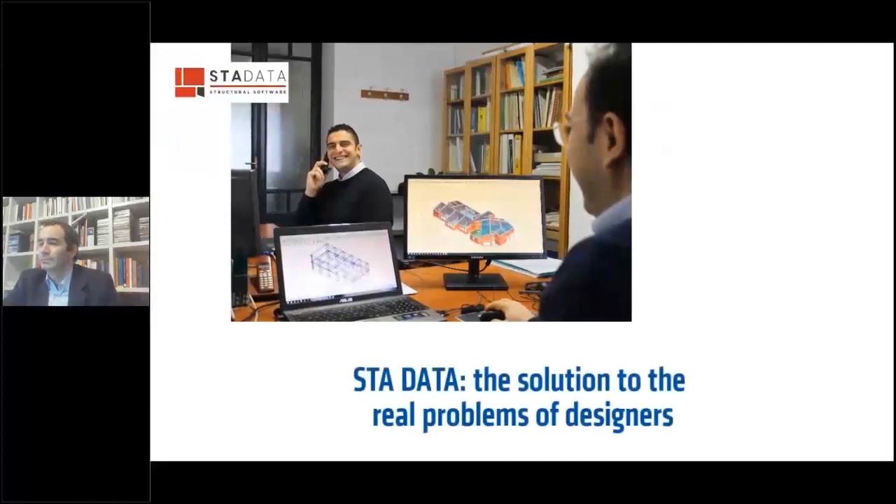The company is currently composed of 15 employees and several consultants, all highly qualified professionals. Thanks to continuous development of work and collaboration with universities and the professional world, it is always able to offer advanced and constant updates to its customers. The Stadata application allows you to face everyday work with simplicity and effectiveness. The company's goal does not end with the search for new IT solutions; the offer of Stadata includes support, training, and consulting services, including individual projects, so that professionals are immediately operational. Thanks to the technical expertise and state-of-the-art solutions, Stadata is a solution to the real problems of designers.

3Muri is the masonry structures analysis specialized software. It is the leader in the world. It is used for existing and new buildings. The software performs nonlinear pushover analysis. The mesh is made with the FME method, frame by macro element, specially studied for masonry structures to better represent the behavior of masonry structures.

Now the software is available in Italian, Greek, English, German, French, and Albanian, and performs analysis according to Eurocode 6, Eurocode 8, the Italian National Code, Switzerland National Code, and the Netherlands National Code. 3Muri takes its origin from Professor Lagomarsino's academic research, and is actually used for this purpose in more than 80 universities. Engineers and companies that use 3Muri for professional purposes are widespread in more than 30 countries.

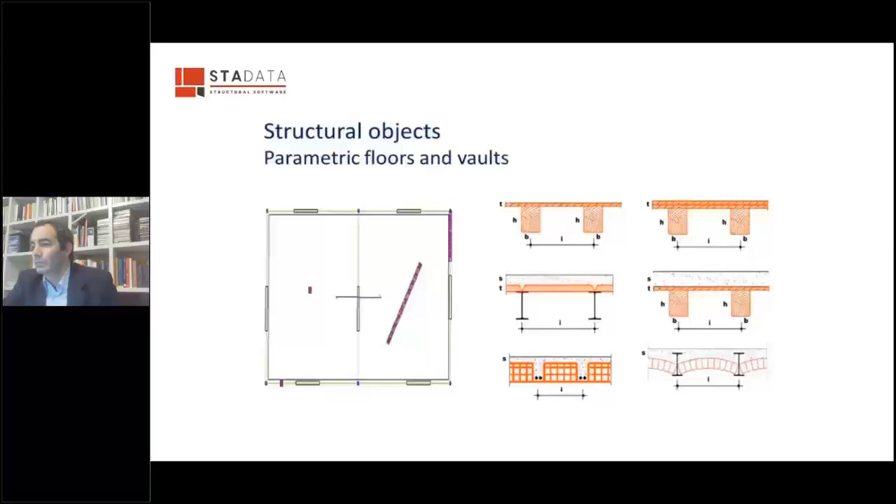These are the floors that are available in 3Muri. Even if the majority of floors can be modeled with this library, in 3Muri it's always possible to define directly all the parameters of a floor, in order to create your own definition and achieve the real stiffness of the real floor you have in the structure.

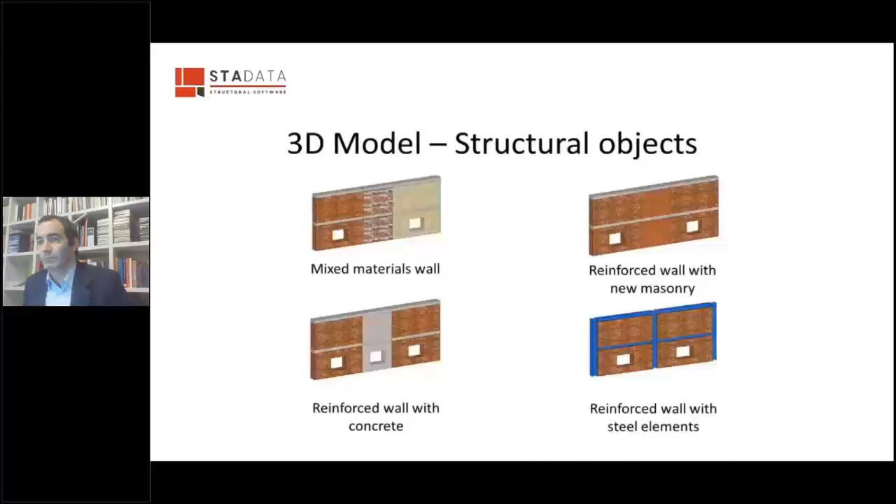Moving to the vertical elements, several structural objects can be modeled in 3Muri, like single masonry walls or reinforced concrete walls, columns and beams, and a combination of walls with beams and tie rods. Inside a wall, different materials and different elements can be modeled, and they can also have the function of reinforcing the current wall.

To reinforce walls in 3Muri, you can easily also model reinforced masonry, with reinforcement using FRP and FRCM. The mesh inside 3Muri is specialized for masonry structures and is made with a frame-by-macro-elements method. This method has been studied for masonry structures to better represent the behavior of a structure made with masonry as the main structure. Using this method, thanks to the automatic mesh performed by the software, the engineer can easily pass from reality to the model, taking into account all the significant aspects of the structure.

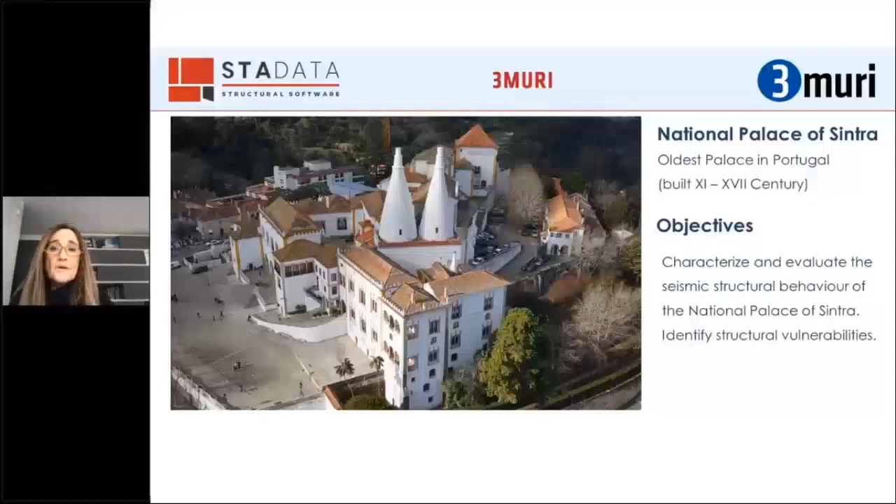In order to perform a complete seismic assessment of the palace, a multidisciplinary approach was followed with a multidisciplinary team. A historical approach was performed along with a visual structural in-situ survey. Significant in-situ surveys were done before proceeding with the experimental campaign. For the experimental campaign, we started with a geometric survey using a laser scanner and a Falcon 8 Plus drone. We also performed ground penetrating radar surveys, sample collection for the masonry, flat jack tests, and ambient vibration tests.

From the cloud points obtained with the laser scanner and the drone, a 3D BIM model was developed in Revit, which includes, beyond the geometry, attributed data of various types assigned to each element of the BIM model. So we included in the final model historical documentation, description of materials, construction stages, information from experimental in-situ tests, and even the main outcomes from the seismic assessment analysis performed on the whole palace.

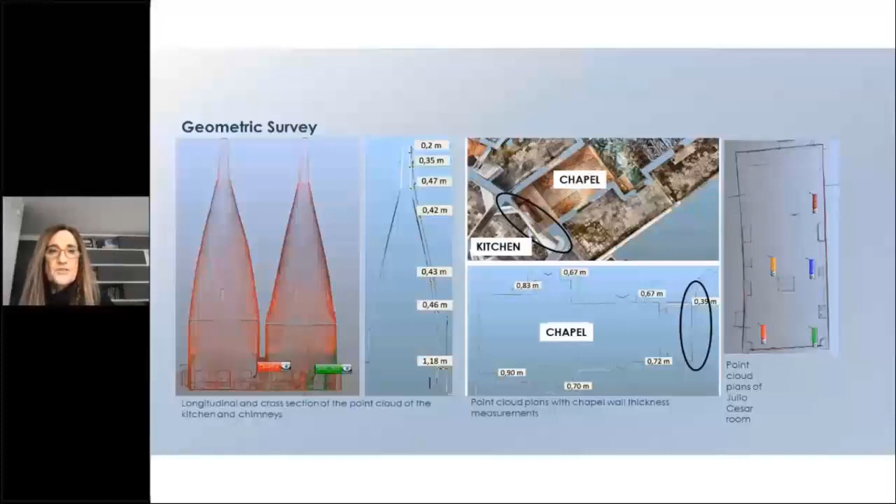So what we have is the complete geometry of the two massive conic chimneys in the palace, the possibility to be sure about the thickness of some walls which connect different parts of the palace, such as the chapel and the kitchen, where the width varies completely along the length of the wall, or to detect some curved walls that would have been impossible to get from other surveys without using laser scanning.

Thus, for this type of complex masonry building, I think this is the correct way to get the geometric properties of the structures.

As far as the GPR survey is concerned, we performed these tests not only in some of the walls where samples were removed, but also in all the pavements and vaults, just to be sure if they are infill or not, and in some walls that were built against the rock, to be sure how was the connection between the wall, the soil, and the rock.

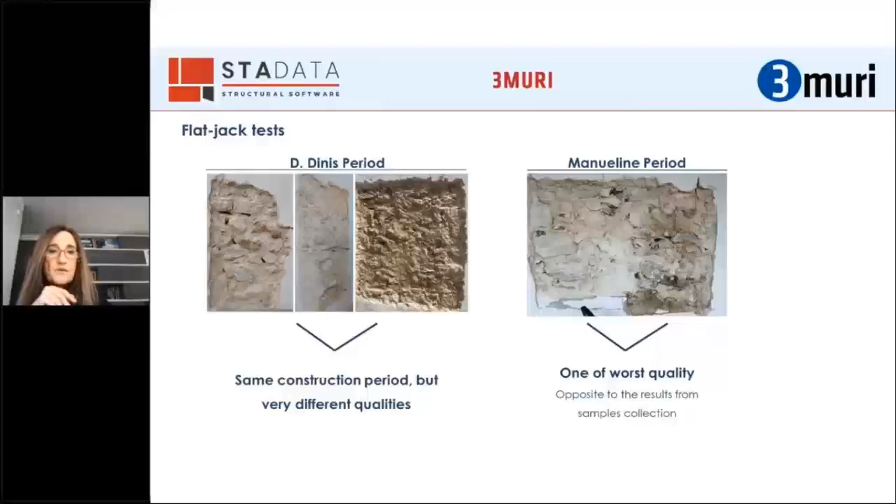The flat jacks were done with 25 centimeter depth for the size of the flat jack. We have here an image of the flat jacks used. The results obtained with these tests were considered with caution, because you have very thick walls and you are testing just the external part of the walls. We performed single and double flat jack tests, and with this we estimate the actual state of stress in the masonry, and of course its strength and stiffness.

A campaign of ambient vibration tests was performed in some of the palace bodies, chosen for their structural importance, existence of damage, and history. These tests allow us to identify the dynamic characteristics or dynamic properties, frequencies and modes of vibration, which in turn were crucial for the numerical calibration of the models.

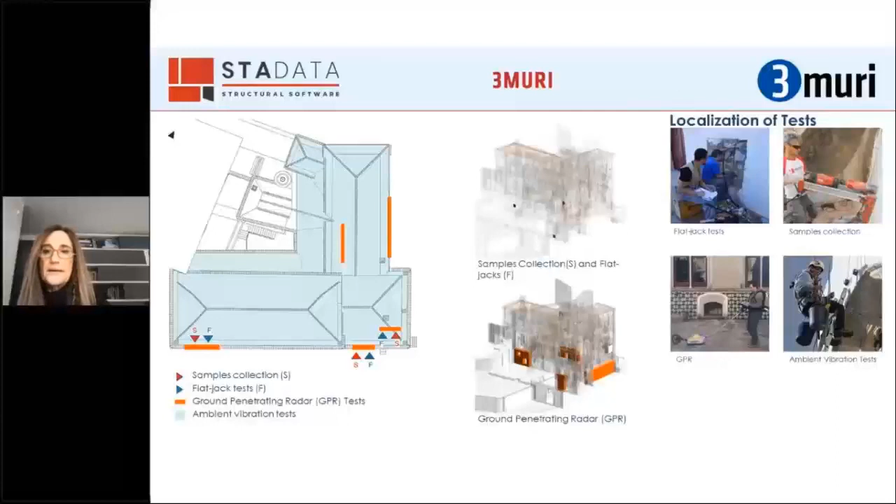The locations of the experimental in situ tests were represented in the BIM model. So you have here the plan view of the Manueline building, and the main results obtained linked to the model or added to it as attributes. We have here some images of the Manueline building and the tests that were performed in this building.

In the BIM model, we identified all the floors and walls where the GPR tests have been performed, and the main results are linked to the BIM model, with the report showing the main results of these GPR tests.

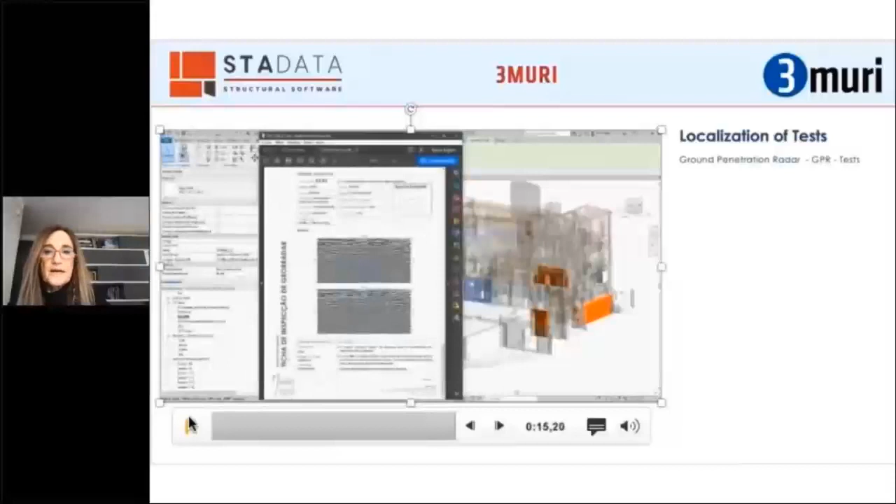The mechanical characterization of the materials, defined after the experimental campaign and calibration of all the numerical models, was also linked to the BIM model. Here you can see, for the same building, all the types of masonry and materials considered in the model, as well as the properties needed to perform the nonlinear analysis of the global model with the 3Muri program.

So let's move now to the definition of the seismic assessment itself and numerical modeling of the palace. The definition of an effective nonlinear model for the seismic analysis of masonry structural elements represents a crucial step towards a proper seismic assessment of existing masonry building structures.

For the seismic assessment of the palace, we considered the in-plane and out-of-plane responses of the masonry, and we performed nonlinear analysis.

Considering the size and complexity of the palace under study, as this figure illustrates, I believe the macro modeling approach is the tool applicable to large-scale computations. Thus, in this study, the seismic behavior was assessed by performing nonlinear analysis through the 3Muri program.

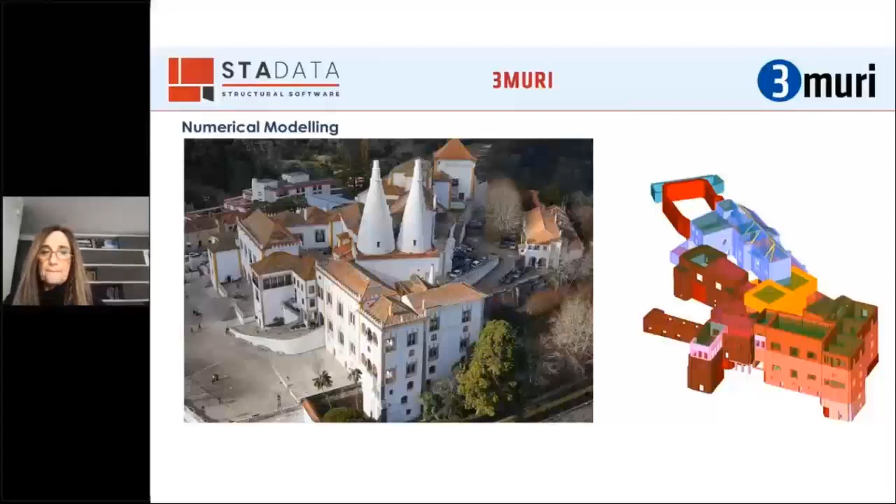Therefore, separate models were developed and calibrated, considering at all times the effect of the adjacent buildings, taking into account the field survey and results of the experimental campaign, mainly the ambient vibration tests, which were crucial for the calibration of the different numerical models.

So here we have the identification of all the bodies considered in this study, with the designation of the names that we gave to all the bodies.

I have to say that among all these units, unit 1, the Manuelino building, and unit 10, which corresponds to the kitchen with two high chimneys, were the most challenging ones, for different reasons.

For the Manuelino building, the challenge was mainly due to the dimension of the building, irregularity in plan and in height, different levels, and walls without continuity in height. These were the main reasons why it was so difficult to reach the final model of this wing of the palace.

For the kitchen, unit 10, the challenge was mainly due to the presence of the two massive chimneys with a conical configuration. In this case, we used different software.

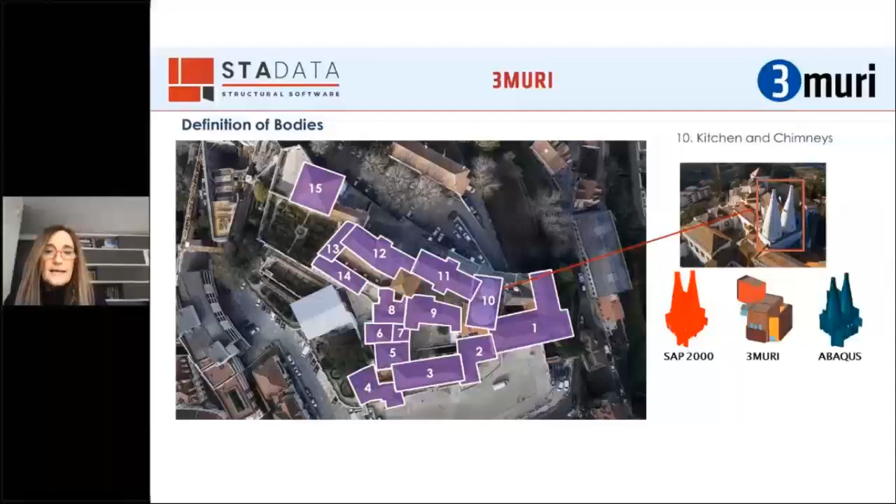So now, to illustrate the type of results obtained, the main results for this Manuelino building and for the other body connected to it, unit 1, I'm going to show very briefly the main results that we obtained.

So for the Manuelino building, as you can see, we have the building itself here, and of course we modeled it taking into account the constraints imposed by the other building. This is the other building which connects to the Manuelino building at this part, and this is the kitchen which connects as well.

So small parts of these buildings are modeled, the ones necessary to obtain the correct dynamic characteristics of the building and the analysis. And we have considered different types of materials, described on the right side of the slide.

For the global seismic assessment, taking into account the in-plane behavior of the walls, we have performed nonlinear static analysis with the Tremuri program. In this slide, the damage pattern is represented for the ultimate displacement of the pushover analysis, for the load applied in both X and Y directions.

The distribution of damage of different masonry walls is represented for the near collapse limit state. This extreme situation allows us to identify the most vulnerable structural masonry walls and the type of behavior we are expecting, shear or bending controlled behavior.

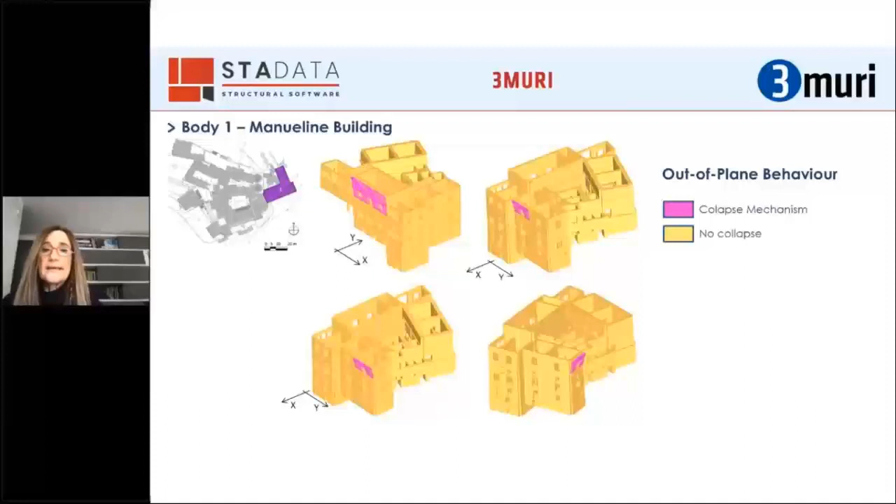So a similar type of study has been done for all the other units or bodies into which we have divided the palace. Just very quickly, what we got for the other buildings, bodies 2, 3, and 4, which were connected to that Manuelino building.

In this slide you have the materials we considered for this body. Here again, the damage pattern having performed the nonlinear static analysis for both directions. Once again, we have shear problems for the piers at this intermediate level.

In this slide it represents only the most vulnerable walls, and again the out-of-plane behavior has been considered as well, taking into account exactly the same factors that I already mentioned.

We have defined different probable mechanisms, and we have studied this out-of-plane behavior.

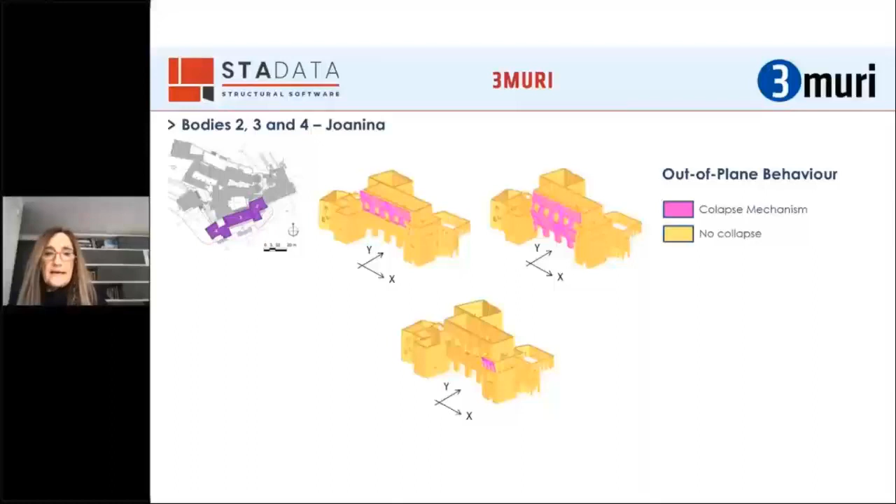So, to finish my presentation, just a few final comments that I would like to give. Due to the complexity of this cultural heritage building, the seismic assessment poses a strong demand on structural engineering skills and, of course, on the available structural analysis techniques.

The procedure followed here seems capable of providing a reliable seismic assessment of such complex structures. In my point of view, it's a good compromise between computational effort and guaranteeing a trustworthy assessment.

So, related to this last image, in this study we had the BIM model represent the distribution of damage of different masonry walls for the near collapse limit state. These have been implemented in the 3D BIM model.

In this work, we did not explore the Tremuri-BIM model. This should be explored in the future, and of course, an easy incorporation of these results in the BIM model.

As attributes, this enhances the capabilities of BIM, and of course it will be very helpful decision support within the heritage management framework, and certainly it will be very useful for any management team of this type of structure.

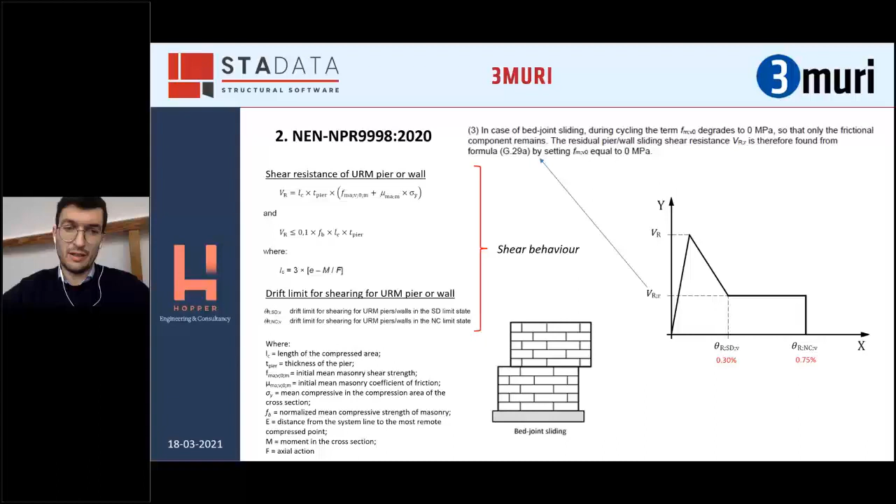Maybe another important thing is when to stop the analysis. Generally, a 20% decay is used. In the Netherlands, in the national code, 50% decay is used, meaning a reduction of the base shear by half, and this is used to define the final pushover curve.

A little bit of insight, because I think it's interesting comparing with what is commonly done in Eurocode, is about the calculation of the demand. In Eurocode, as you know, and also in Italy, we generally use the N2 method. Instead, in the Netherlands, it's normal practice to use the capacity spectrum method.

The capacity spectrum method is basically a method in which the elastic response spectrum should be reduced, accounting for an extra damping. The final damping is a sum of the inherent damping, the common 5%, and the hysteretic damping, which is calculated and suggested by the equations, and generally cannot be bigger than 15%. So one note is that generally all the buildings easily have a 20% damping.

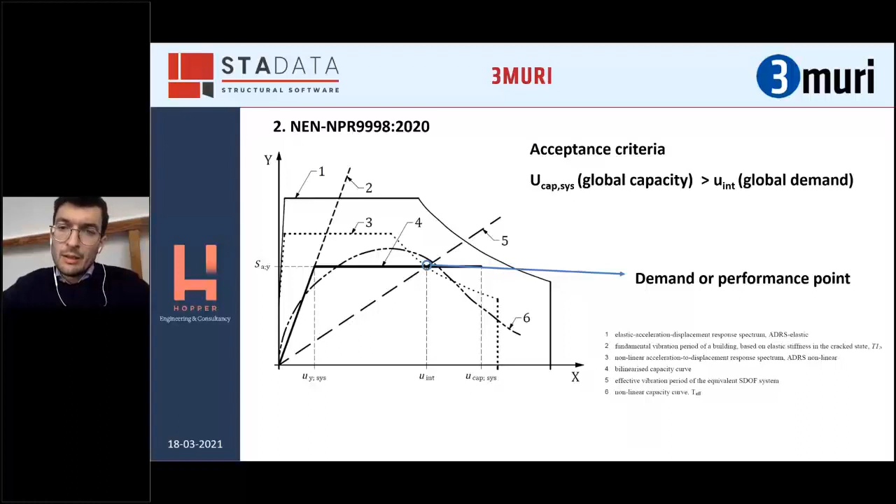Let's move quickly to the examples. Those attending from the Netherlands will recognize this as a very common building type there, also in the Groningen province. This is a terrace house, basically a composition, a block with more units.

It is characterized mainly by large openings in the longitudinal direction in the front and back facade. So we have a very weak direction, the longitudinal, and a very strong direction, the transversal. The load-bearing part is usually the transversal walls. In this case you can see concrete floors, but you can easily find a version of this building with timber floors. The floors generally span from transversal wall to transversal wall.

Another peculiarity of this building is the presence of cavity walls in the perimeter walls, all around, for insulation purposes. The inner leaf usually, not always, is composed of calcium silicate bricks with a thickness of 100 millimeters. There is a cavity gap of variable measure, it depends, and then another leaf composed of clay bricks. So the structural, load-bearing part is the internal one, the inner leaf.

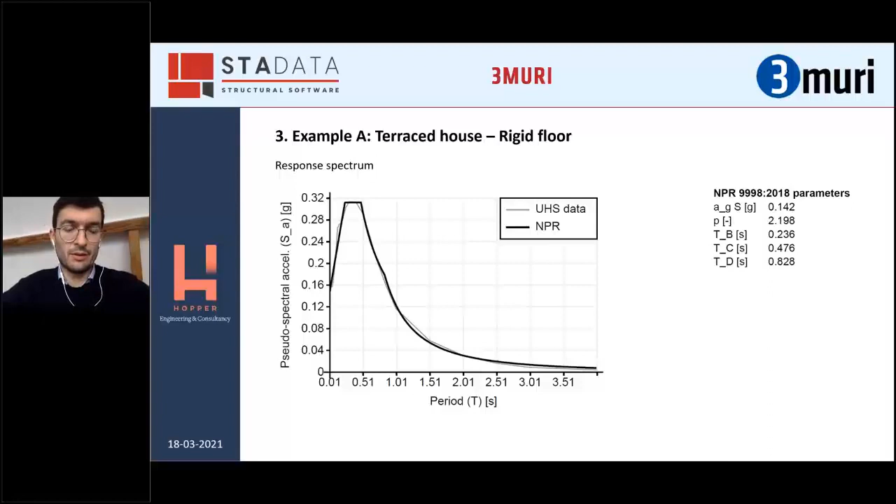Here is an example of how to go from the 3D model to the 3Muri model, to the 3Muri analytical model, in which, as we just said, there is no roof. The response spectrum can easily be downloaded from a web tool.

So some results for this particular building: the longitudinal direction is governed by flexure because the piers are very slender and few of them due to the openings. The capacity is quite large. The spectrum has a damping of 20%, creating an intersection, so the check is okay. The building is okay.

This is the worst combination in X. An interesting aspect of the NPR is that you can account for P-delta effects. Basically, when you have not too many piers, you can derive a factor by which you can reduce the capacity or increase the demand, depending. In this case, we reduce the capacity.

Completely opposite behavior in the Y direction, the strong direction, in which the building is reacting mainly in shear due to the squat walls. As we said at the beginning, this is the strong direction, and you can see by the intersection with the elastic spectrum happening at the elastic range - also in this direction there are basically no issues.

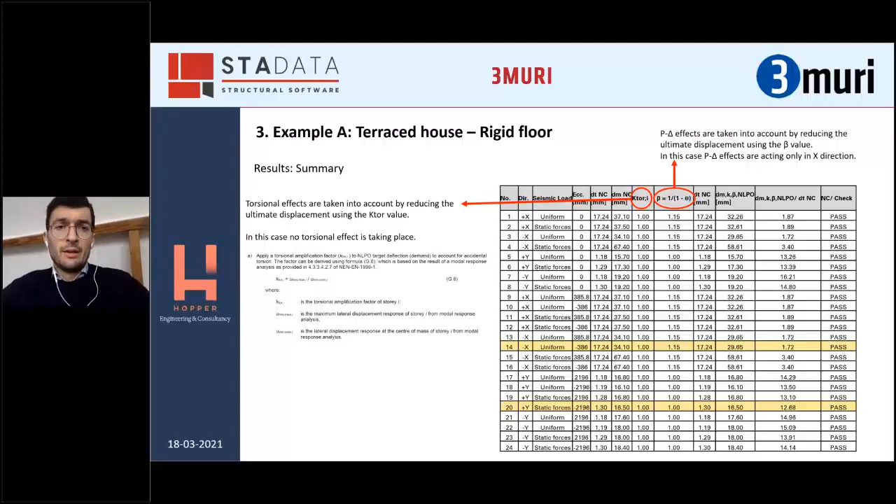As well known, pushover is not enough to provide an idea about deficiencies and possible retrofit measures required for a masonry building. So usually when doing this kind of assessment, we always do a modal response analysis to check the roof and timber components, and also to calculate the torsional factor.

The second typology I would like to present is the so-called detached house, in which basically they are isolated buildings, mainly one floor. They also present a different but still timber roof. Sometimes the roof can be very, very complex. There is no weak and strong direction clearly, so it depends on the configuration of the internal walls.

Also for these buildings, we can have cavity walls or solid 100 millimeter walls or solid 210 millimeter walls, but always quite slender walls. A challenge of these buildings to model in 3Muri is that sometimes some of the walls are basically below the level of the ground floor. So usually we fix a floor level and then we play with individual walls in order to match the effective height of the pier, since the final capacity of the buildings will be derived from the effective height.

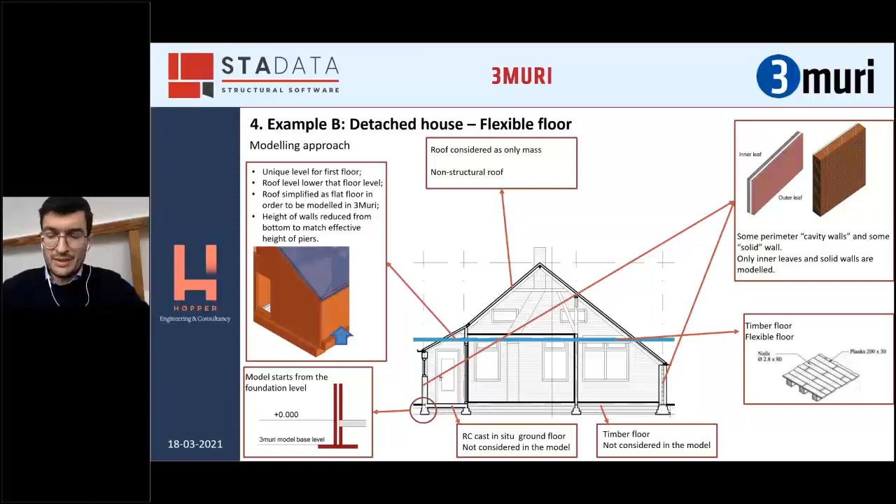Same as the previous building, we don't model the roof structure. Another peculiarity of these buildings is very often they have timber floors, so flexible floors. Comparing with the previous building, in which a global analysis is correct and possible, for this type of building, since redistribution is not guaranteed by the flexible floor, we prefer an assessment wall by wall, in which redistribution is not taken into account at all.

So again, this is shown now to go from a 3D model to a 3Muri model to a 3Muri analytical model, in which we don't have the roof. Response spectrum follows the same as before. Results in this case are presented wall by wall, as we said. This is again one of the worst combinations in the X direction, in which the outcome is positive.

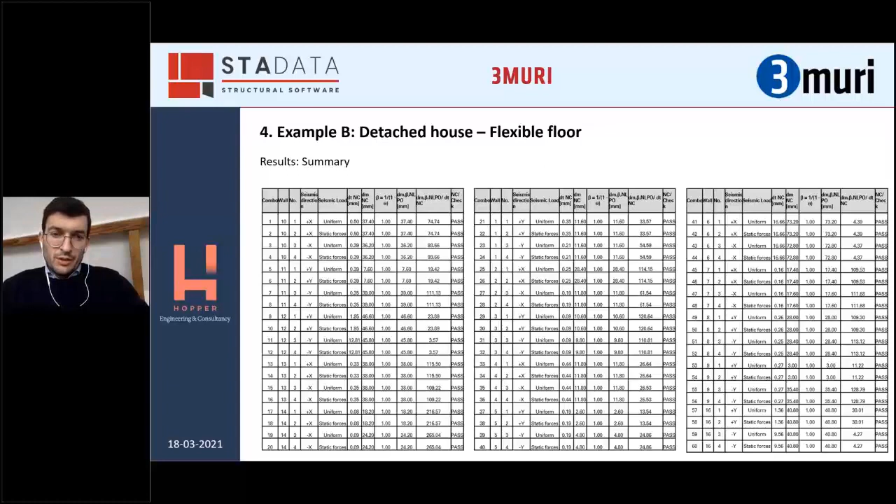Same for a wall in the Y direction. And if you want to have a summary, here of course the combinations are more, but they are not the combination - it's just that it's a wall-by-wall assessment. As you can see also here, basically all the walls are fine.

So again, I will not repeat, but basically in order to have an idea about the building, a number of other analyses, assessments, and checks need to be done.

So finally, some conclusions to wrap up. Along the years, specific advanced studies and analysis were carried out in order to adapt the approach from Eurocode and New Zealand code to Dutch buildings for the in-plane assessment. Several tests and research programs were carried out along the years to improve and remove conservatism from the Dutch seismic code. The substantial reduction of gas extraction in the region during the years led to a decrease of the seismic hazard prevision. And as a result, despite the vulnerability of the buildings and walls that I highlighted somehow, there is generally no need for retrofit for the in-plane behavior in the vast majority of the cases, basically.

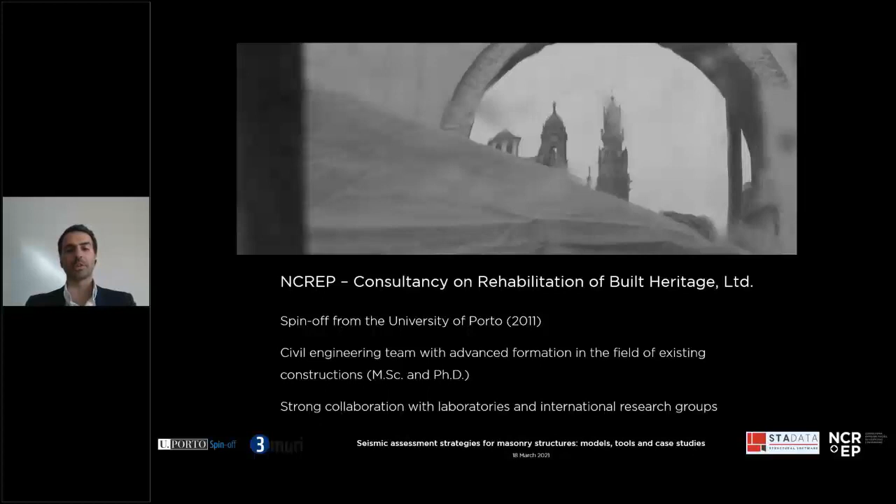Our main services can be divided into 4: inspection and diagnosis, structural health monitoring, seismic assessment, and the design of rehabilitation and sustainable projects for different types of constructions.

Taking into account a good network that we are developing from research inside Portugal, but also in Spain, Belgium, and Italy, with very good collaboration with the University of Pavia, we have been doing several works on characterizing the seismic behavior of traditional masonry buildings in low seismicity regions.

We have been working mainly in Porto, and this last year we were also able to do some work in the city of Liège in Belgium. The approach was similar: we started from the selection of the most representative building archetypes, then developed and calibrated macro element parameters to simulate the in-plane behavior for this type of building, and then analyzed typical buildings from these 2 cities.

These are 7 models that we used in the Porto region, and based on these models we did nonlinear static assessment with 3Muri, analyzing the buildings in original conditions and then also retrofitted ones. We then validated these results with nonlinear dynamic analysis, taking into account the flexibility of the diaphragms, making use of these models—work that we just finished this year.

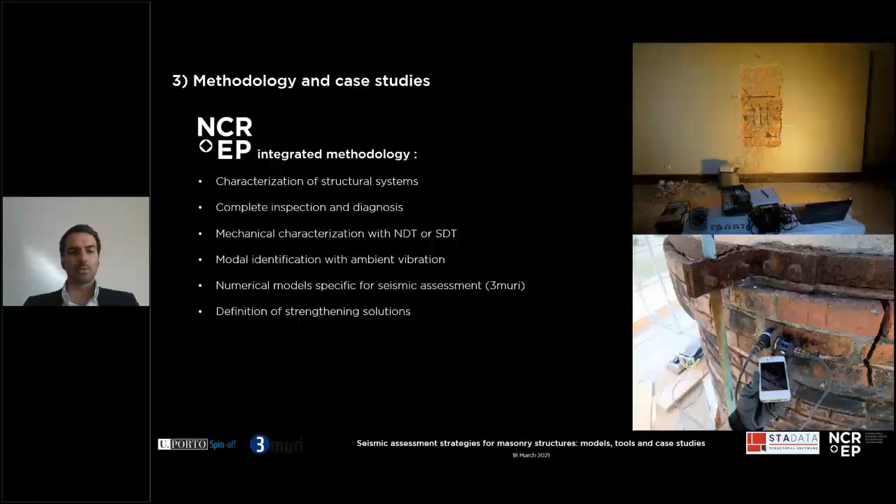With all this information, we develop our numerical models specifically for seismic assessment, where 3Muri is our main software for masonry structures. With all these elements, we are able to define the best strengthening solutions for each type of building.

Let's look at the actual conditions in Portugal. Despite Eurocode being used all around Europe, in Portugal it's only been legal normative since 2019, and since then it's mandatory to perform seismic vulnerability assessment reports for existing buildings. However, we have been using 3Muri since 2016, and one of the cases I'm going to show is the first building we simulated using 3Muri.

What are our main challenges? Basically the definition of masonry mechanical properties for seismic assessment, because there isn't a huge database we can consult—for example, like the Italian normative, which has very good indications of masonry properties. In Portugal, we don't have this type of information, so we make a literature-based definition with special relevance to the Italian normative, and we also use our own database, which we keep increasing.

We now have almost 50 double flat jack tests performed on different types of masonry structures, and our main goal is to continue increasing this database so we can more specifically select the best mechanical properties. Taking into account all these elements, I'm going to show you two case studies.

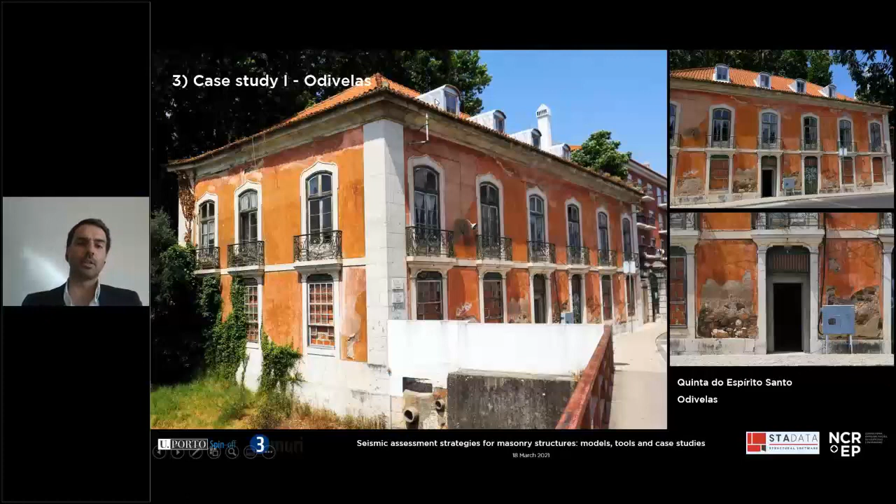Concerning the first case study: we have a ground floor, first floor, and an attic that was used during all these years. This building has an estimated construction date of the 18th century, with a total construction area of 780 square meters. It is a traditional masonry and timber structure, and it was abandoned since 2005.

What were the main challenges in this building? Despite being low—it's not a very high building—one of the main challenges was its intended use as a museum, and we'll see afterwards what implications that had on the design. It also has flexible diaphragms with timber floors.

One of the major problems of this building was the presence of severe termite attacks. This is, for example, a wall on the last floor—a lightweight timber wall fully attacked by termites, as you can see on the right. This means the timber elements were in a bad state of conservation.

In the end, this was a problem, but the major issue was at the first floor, between the ground floor and the attic roof, we have all these walls with mural paintings. This was a major problem in this case study.

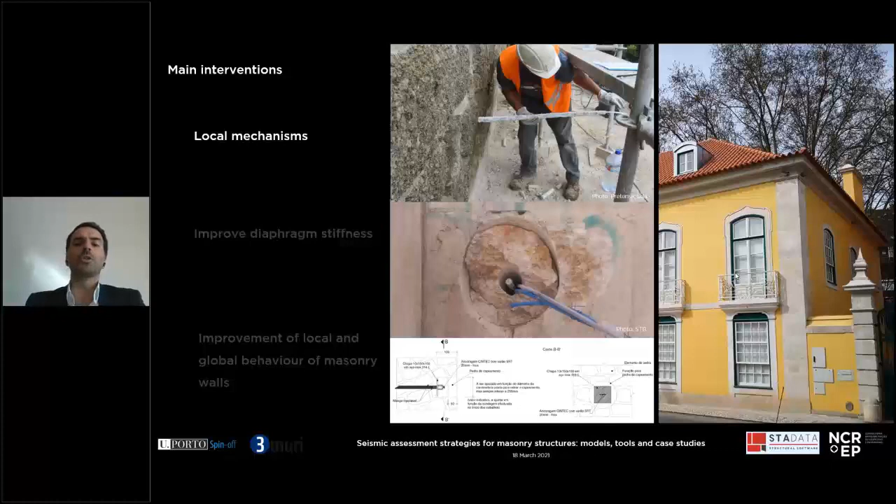Also some improvements to the diaphragm stiffness. How did we do it? We took into account the existing timber elements that were in the best state of conservation, but introduced intermediate supports so we could maintain these elements and keep the floorboards at the upper floors. Using horizontal timber trusses, we increased the stiffness of the diaphragm under shear and distortion forces. By connecting these elements to the perpendicular walls, we also improved the connection between horizontal and vertical elements. This is an image at the top of the ground floor, and this at the top of the first floor.

So we have a new timber floor for the attic, using a double layer of OSB strand boards, which improved the shear stiffness of the diaphragms.

Concerning the global and local behavior of masonry, some masonry elements—as shown here from the ground floor—were reconstructed using timber framed walls.

These are some images from the walls, from the demolished part that was not in a good state of conservation. They were supposed to be injected, but during the construction works, it was decided not to go for a museum, but just a more common office building. In the end, it was possible not to use injections to improve the seismic behavior.

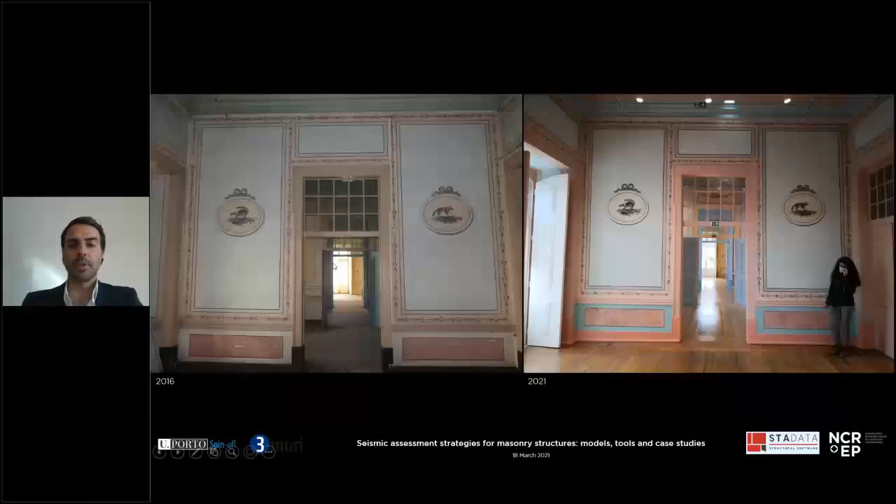Here's some local reconstruction of the timber floors and of all the frontal walls. Now some final images, just to figure out what can be done. We can see here that all these paintings were maintained. These are the original floorboards. The roof, the ceiling was reconstructed. This is the same compartment before and after the intervention.

And it came out that with 3Muri, we were able to keep the building as it was. Our main purpose was to keep the first floor.

So the second case study I want to show you is a typical building from Lisbon. It is a 5-story high building, with a possible date of construction in the late 19th century. It has a total area of 6,500 square meters, also with a traditional timber masonry structure. You can see here, mainly at the perimeter, walls of limestone masonry, the inner core also of masonry walls, and then some intermediate load-bearing walls that we'll see how they are built. So what were the main challenges here?

There was an extensive inspection and diagnosis campaign to characterize correctly these masonry elements, in order to model it correctly. Also mechanical characterization using flat jack tests and some cores, and we evaluated the dynamic behavior of the building using ambient vibration tests. This was a problem because it was a corner building, which could be an issue that we needed to address and assess with the seismic analysis. The final occupation of the building was to be used as offices.

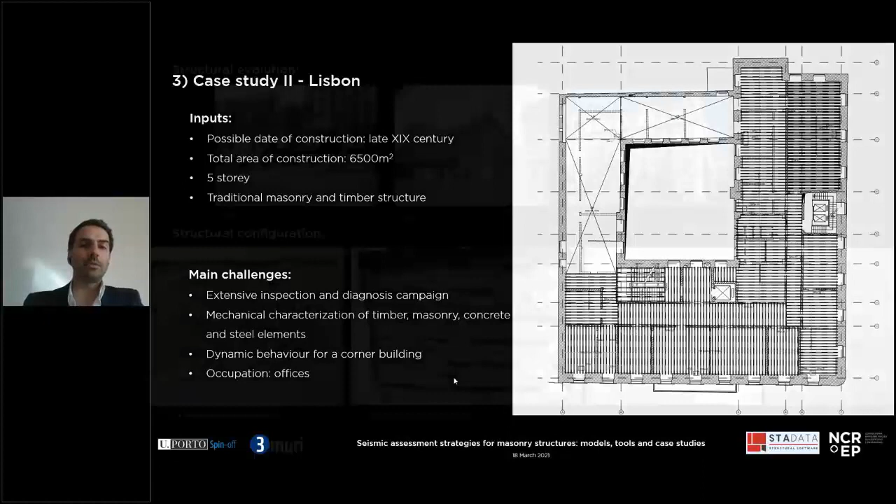So taking into account all the information, we start doing the work. One of the first points was that we figured out from some images from the late 19th century that until 1940, the building was just 3-story high. So in the middle of the 20th century, it came up with 2 more stories.

Also, another surprise was that these external and inner core walls were built on masonry, but the internal load-bearing walls were made mainly of timber elements that were supporting all these 5 stories.

What was used in our 3Muri model was to assume only masonry walls as primary seismic elements, as you can see here. These intermediate walls were not introduced due to negligible contribution to the seismic resistance. We have been doing some work in this area, and in the end, the stiffness and strength of the masonry is too great to be able to distribute the seismic forces to other vertical elements.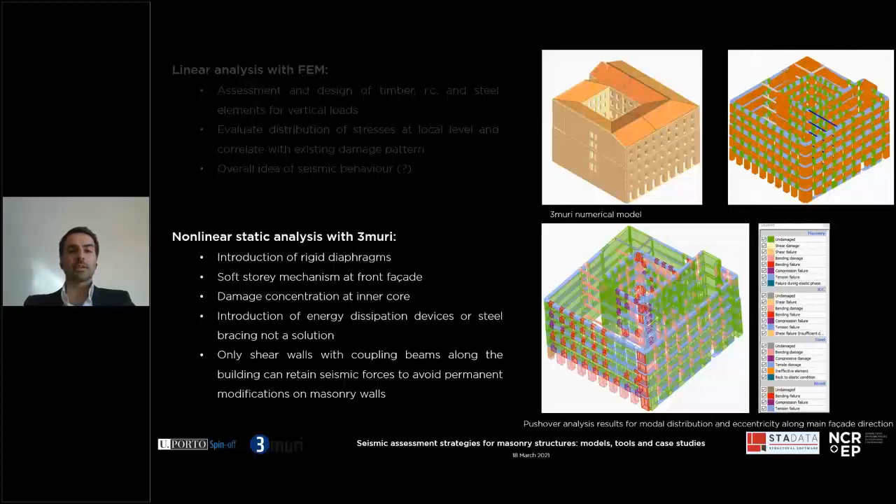As final remarks, I would say that before starting a deep seismic assessment of an existing building, it is quite important to do a complete inspection and diagnosis. And of course, when working with existing masonry buildings, nonlinear behavior is fundamental.

And for these purposes, 3Muri comes with a fast and efficient tool for the nonlinear seismic assessment. Just as a final comment, what we have been facing is that for these massive masonry buildings, we have difficulties changing the primary seismic system from masonry walls to other types of systems.

So the next challenge, coming in the next few days or months, will be the modeling and seismic assessment of this monastery of Odivelas, and of course 3Muri will again be our main software. I'll let you also get in touch with Ana Simões, who represents 3Muri in Portugal. If you need something, just contact her.

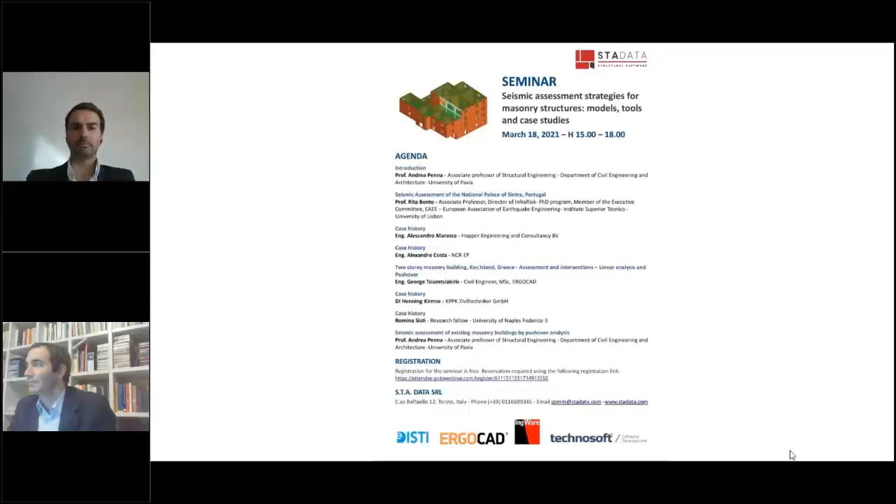I had lost control of my microphone, so I couldn't tell anything about your very interesting presentation. I think I made the right choice in skipping many case studies in my own presentation, because the presentations you, Alessandro and Rita have given so far, and probably the others as well, will be much more interesting and nice than mine. So I think that was a good choice.

Thank you again for this clear illustration of what you have done, the reasons, results, and methods used. That was, I think, very interesting.

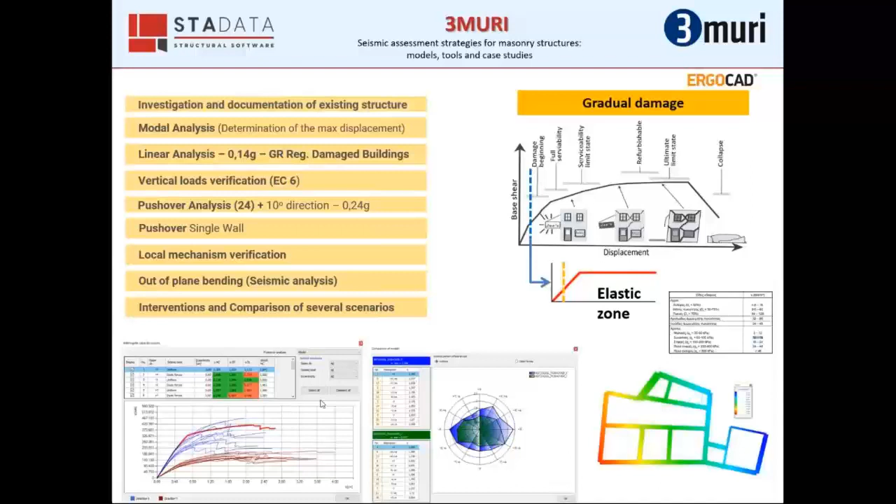First and foremost, we verified the geometry of the whole building and every element, and all the laboratory tests were done to find the type of masonry. From various parts of the building, we discovered that it had two-layer walls consisting of volcanic rock, marl, and limestone.

These photos are from the building. We can see here that there is an existing tie rod on the walls. And finally, we received as the characteristic compressive strength a value Fk of 3.05 megapascal. At the same time, we categorized the damages of each wall based on the categories provided by the Greek regulation for earthquake damaged buildings.

On the left, we can see the four categories A, B, C, D, and on the right, the ground floor plan and the first floor plan.

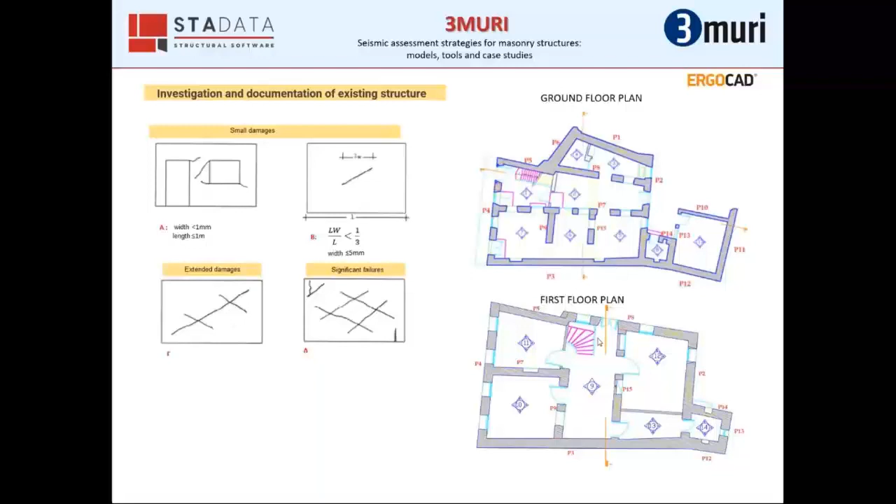In this slide, you can see again the floor plan of the ground floor and the fixing of the damages. The studies were done by Mrs. Halkidou and Mr. Sifonios.

Here we see the categories of each damage. The sum of the damages led us to the conclusion that this is a global failure and not a local one, so it was necessary to proceed with a global analysis.

As we mentioned earlier, we had to use the linear analysis because the building was built before 1959, and to insert the seismic forces as horizontal loads to the center of mass of every level with the same value. This is the formula we used, where epsilon takes the value of 0.14 of G and Ni are the vertical loads of each level.

For newer buildings, the distribution is different, as shown here on the right.

So we performed the linear analysis and noted the points where the damages appear on the walls. The goal was to then perform the operations on the damaged elements and to check if they are sufficient, or if due to the operations, failures in other elements occur.

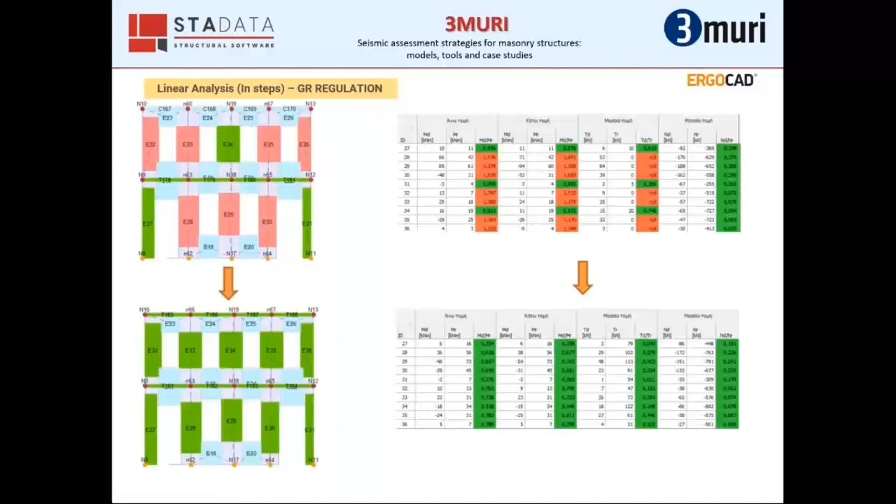Let's see the steps of this procedure. First step, we check the existing building before the damages. We get the results and we continue with the second step. Now we have to repair the damaged elements and check at the same time the remaining undamaged elements.

These are the interventions. First, we remove partially the mortar and install injection tubes at a distance of 30 to 70 centimeters in a diamond shape. Then we apply the Limepor IZ8 injection, which contains natural hydraulic lime because we couldn't apply mortar based on cement. Then we add facade grout with Kimia Tectoria M10 mortar. And finally, we have the application of Kimisteel Connect and the wall mesh MR system in two directions.

We have to mention that according to the new Greek regulation for the intervention of masonry buildings, named KADET, which is under development as we mentioned earlier, the application of deep pointing from 3 to 5 centimeters increases the compressive strength by about 15% using this formula, and by about 7% when we apply injection grout using the second formula. In our case, we used both of these interventions plus the wall mesh MR system, and for this reason we increased the compressive strength of the wall and the shear strength by about 15%.

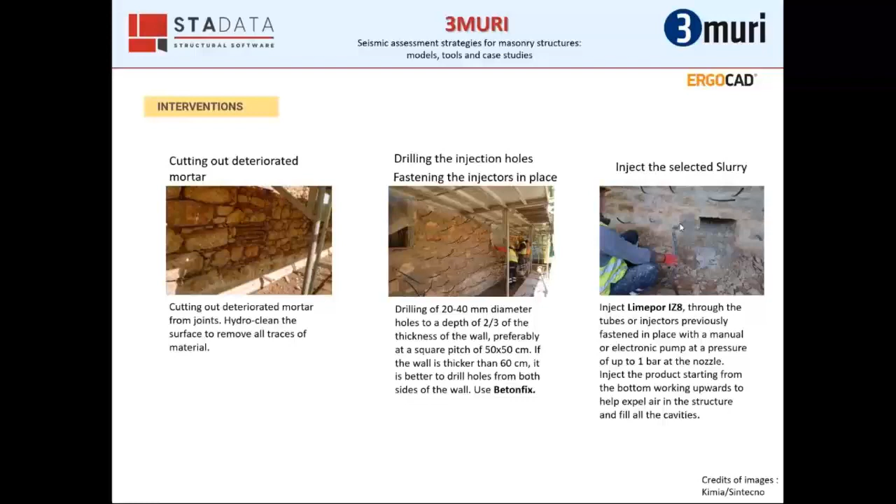Some days later, we started leveling. We prepared the mortar, laid down the first layer, and then made it smooth. We put the mesh and embedded it.

Later, we drill the wall and insert the connectors and lock them. Finally, we overlay the connectors and apply the final layer of plaster.

During the same second step of analysis, we decided to add a new layer with wooden planks in order to improve the displacement of the first floor.

After the analysis, we had some failures on undamaged elements, so we decided to replace the existing timber floor of the second level with a concrete slab, and we added concrete beams on the external walls. Finally, we applied the reinforcement, putting a vertical and horizontal mesh of rebars of 8 millimeters diameter every 15 centimeters.

In addition to linear analysis, we ran a static analysis for the verifications of vertical loads as described in Eurocode 6, where all the walls had enough bearing capacity. We can see the results here.

We also ran a modal analysis in order to determine the node which has the maximum displacement. This could be the control node of the pushover analysis, because we wanted to find the percentage of the mass which is effective for each mode, and later we checked the walls through a seismic analysis for the out-of-plane bending.

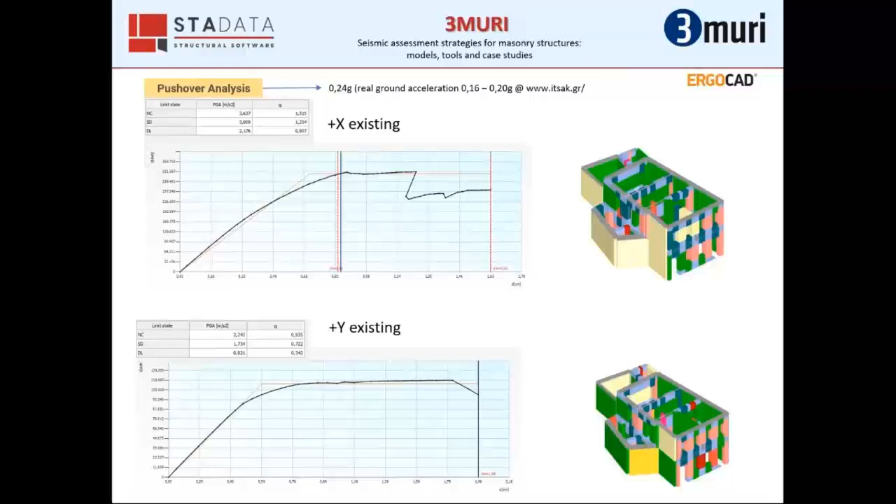Also, we have to note that the maximum displacement of the existing building was 1.63 in X direction and 0.98 in Y direction.

After the intervention, we had 2.65 in X direction and almost 3 in Y direction.

Based on the results of another pushover analysis where we used ground acceleration of 0.14 of G, similar to the linear analysis, we can say that the total cost of intervention could be reduced by about 30%, comparing to the conservative results of the linear analysis for the same ground acceleration.

It is worthwhile to mention that 3Muri gives a lot of tools to the end user. In this case, for example, we ran pushover analysis for all the main directions and eccentricities of the 3D model, 24 in total, but we also ran additional analysis for more directions in order to verify how the structure reacts to the direction of the real seismic force.

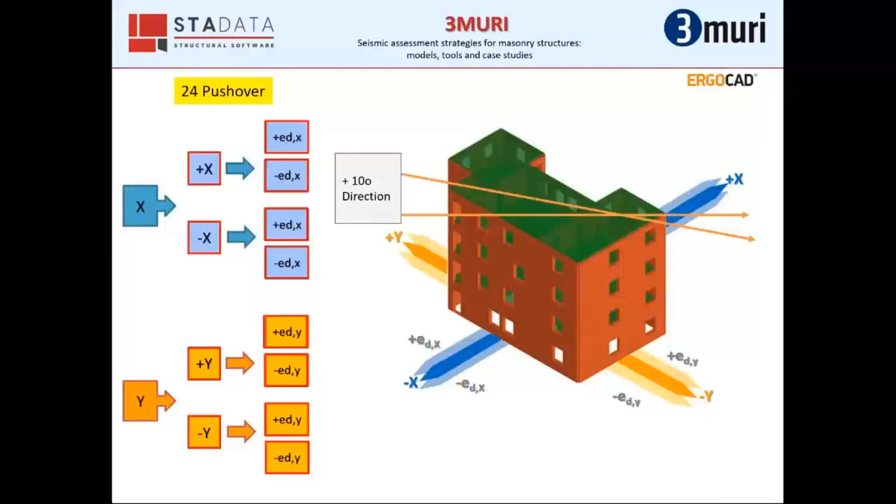We also, in this example, checked how the structure can respond if we divide it into two parts. The results were obviously better, but the division is not acceptable because of the region where the structure is built.

One of the advantages of 3Muri is the tool of local mechanism, which helps us to check every single part of the walls for the out-of-plane behavior.

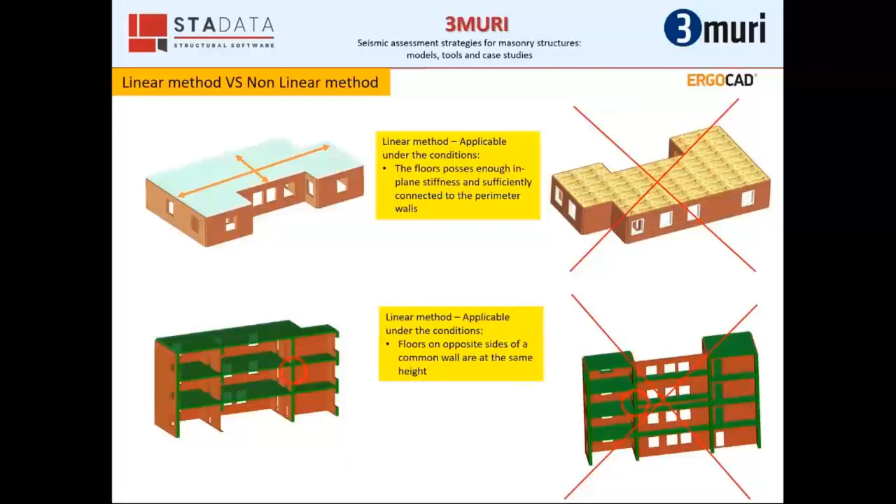Non-linear methods should be applied when the conditions are not met. Since all the existing masonry buildings have floors made of timber, it's not possible for the engineers to use linear analysis, and it is something that has to be solved in the future.

I think this presentation was also very interesting, and in particular, it is interesting to compare the different approaches and the different code regulations that are still implemented in different European countries. Besides, we have a common code, which is Eurocode. Then the national regulations can be very, very different.

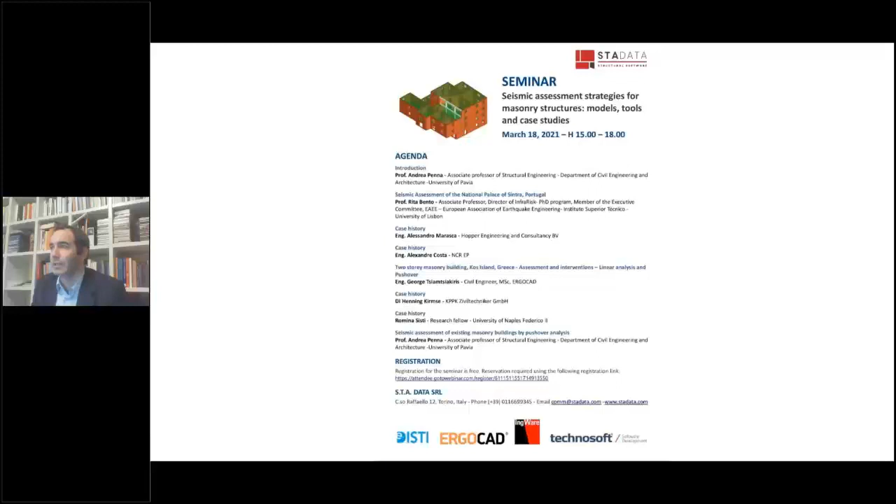The same applies in particular for the presentation by Alessandro Marasca, showing the application of this Dutch code that was actually partly derived from Eurocode, but also with some influence from the New Zealand and US codes.

I think we can now move to the next presenter, which is Henning Kirmse from Austria. I think that there will be some other interesting case studies and analysis that he will show us. Thank you, Henning.

Thank you very much. First of all, I feel very honored to be invited also to that event by ingWare and STA DATA. And I want to switch. Can you hear me? I guess it's fine. Yes, we can hear you. I can see you. Okay. Still not okay, screen must be there now. We see it as well. Okay, go on. Yeah.

Because I understood it as an interactive exchange, so I don't want to go so much in detail. I just had the idea to present a little bit how the situation is in Austria, especially in Vienna, what types of buildings we have, what is mostly our task, what we have to do there.

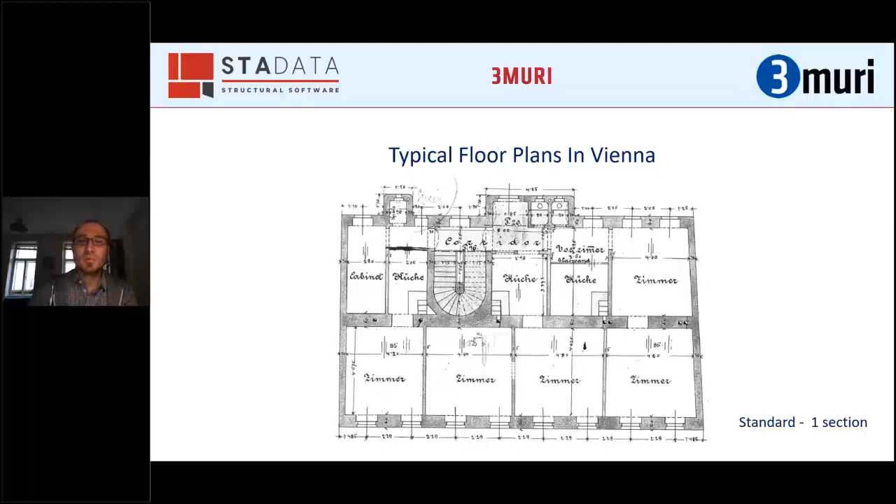So that is what I told before already. The main walls are where all the loads go. That means these secondary walls are in the y direction.

Main walls typically have sizes around 60 centimeters in the upper stories. They will be a little bit less, like 45, except the middle wall, which stays 60 centimeters from the ground floor to the attic level, because there are also chimneys inside very often.

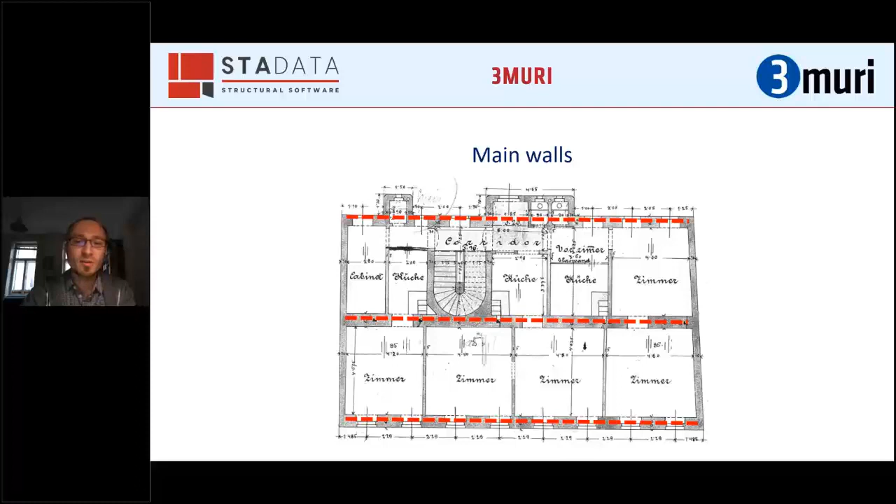The secondary walls are the walls to the neighbor on that side, which are mostly 30 centimeter, and in the attic level only 15. The staircase walls are also like 30 or 45.

Then this special thing, these extra walls, which are rectangular to the outside walls, are very thin walls. They don't take any loads, they're just for the building there in between, and these walls are mostly the important factor.

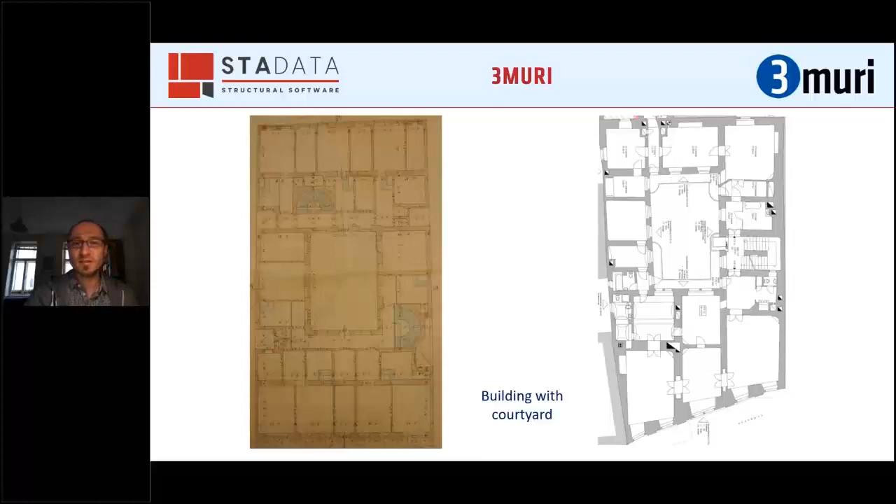Also, sometimes you will find houses with a courtyard inside and the house going around it. This is a special big one that goes around and also has a circular corridor inside that goes around. This means you have this staircase here, and here, all connected with one corridor which is going around.

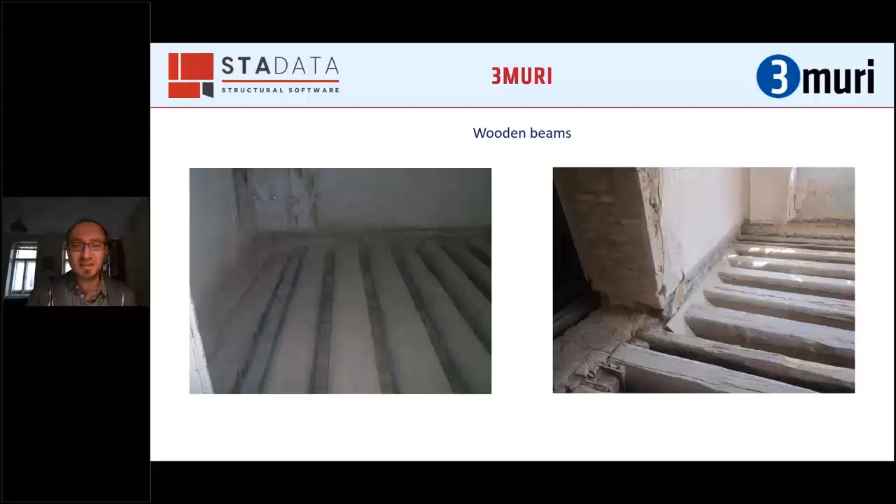And then we have that Dippelbaum ceiling. I did not translate that because I was not sure what I could find in English. That means you have one wood piece next to the other, and they're connected with solid wooden pegs, which gives that construction a very solid type. This is found mostly as the last level above the 3rd story or so, you can say. You will find this type of ceiling very often.

And then sometimes in the later part of the period, you will find not only wooden beams, you will find steel beams, and between the steel beams you will have the wooden beams. Steel beams then have a distance of 3 meters or something like that, so the wooden beams inside are a little bit smaller than before.

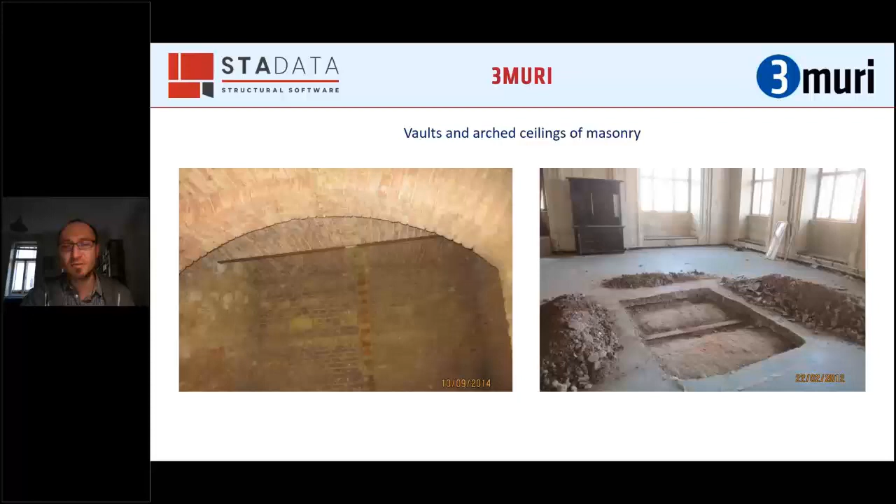Of course, then vaults and arched ceilings of masonry, this is mostly found in the cellar or above the ground floor. Sometimes in bigger buildings you will find it also in almost every floor, and typically the ground of the bathrooms or something like that are mostly built up with these ceilings. This is also a cellar type vault, which is typical to find.

And then strengthened construction is mostly done by the composite structure of wooden beams and a small concrete slab around 8 centimeters, which gives that ceiling a lot of stiffness, so that you connect all the walls of the building in that area of the ceiling.

Then I must say, by the authorities until 2008 or so, there was a standard regarding seismic loads, and then from 2008 started the era of the EC8, and in the beginning it was a very difficult thing with attic conversions because it was not clear how to do that in a static analysis.

And then in 2013 came the new national annex, and here it was found that it is similar to the Swiss standard, because all these buildings don't have 100% earthquake resistance. It's really rare to find that. So that means we have to see what's the resistance of the existing building, and what's the resistance after the construction.

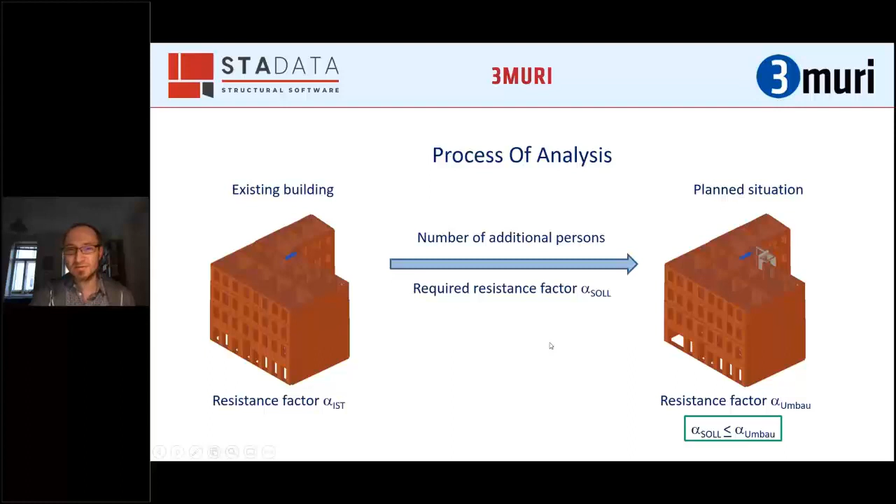What I forgot to mention is that it's important to know, additional persons is only 50% more than existing in the existing building. So that does not mean you can bring up more than 5 flats extra in that case.

Okay, then I'm coming to 2 projects. This is a very typical one, which is now in the authority phase, the permission phase. This is a typical building. Here you see the existing situation done in 3Muri, and the mesh with the ground view, and we could figure out the element wall, which comes to about 43%, 44% of the earthquake resistance.

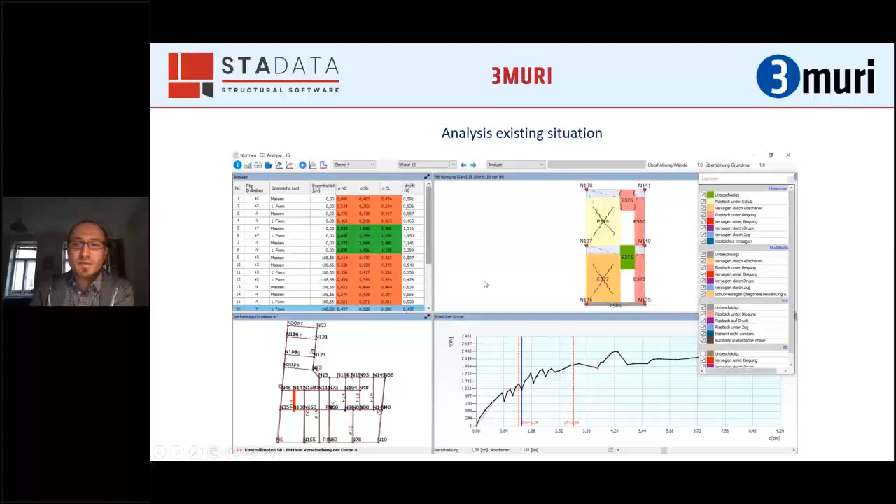And then the planned situation, the strengthening was the ceiling above the 3rd floor, because that was also made of wooden beams, and there will come a composite wooden beam concrete ceiling, which connects all the inside walls and can transport the shear forces from one wall to the next one, and we can activate walls like that. And also, of course, there is a lift here in concrete, which will bring a positive effect.

And then we are calculating the planned situation, and the building will stay the same, only loads will be changed, and the lift is coming and the ceiling. And you will find the important element here, and we could raise the seismic resistance by around 10%.

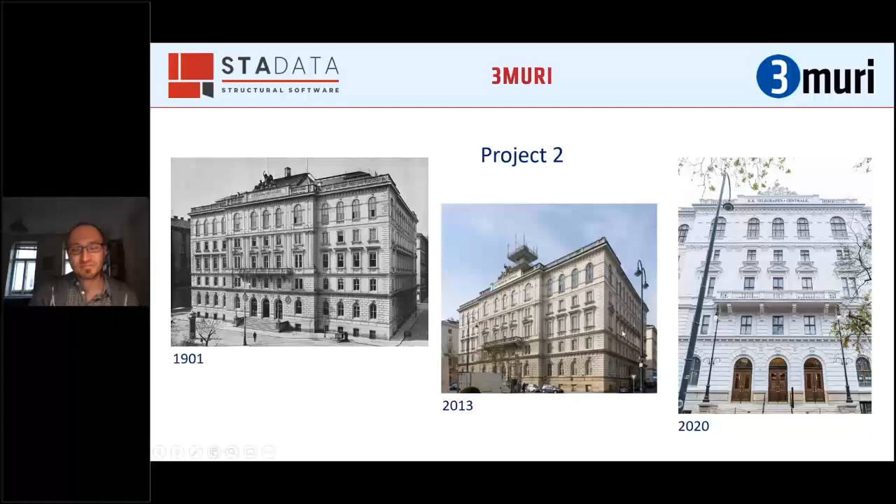Project 2 is a little bigger one and has a longer history. You can see here a little bit on the photos what was the history. They built up an antenna here, and now it has to be rebuilt. So that is also the existing situation you see here. Special is that in that story there's a big hall, you can say. These rooms are around 7 meters high or so.

And then we were again calculating that with the 3Muri. We found there was an existing concrete shaft inside, found the element. And then some more strengthening has been done, such as steel frames here in those areas.

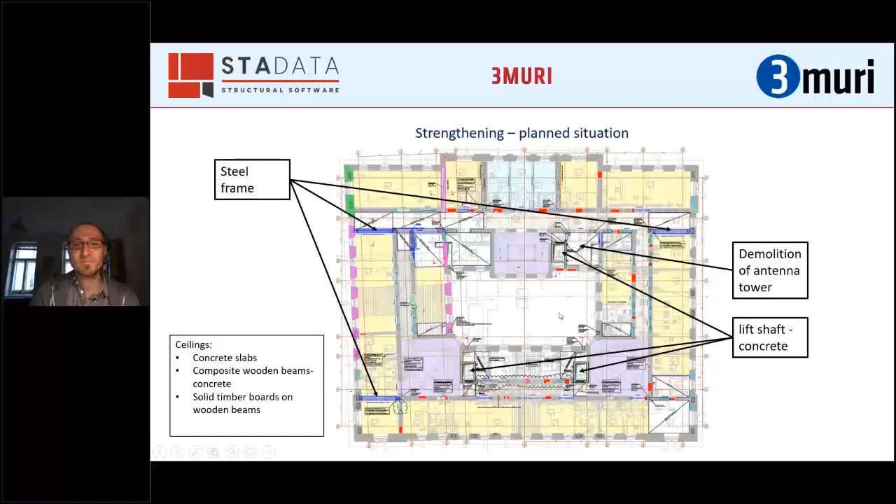Ceilings, all ceilings were stiffened with either concrete slabs or composite wooden beam concrete, or solid timber boards on wooden beams. And also new shafts for lifts were built up inside and connected with concrete slabs to the rest of the building. And then it was also calculated again.

You see here these lift shafts inside. And again, we got after that the new seismic resistance.

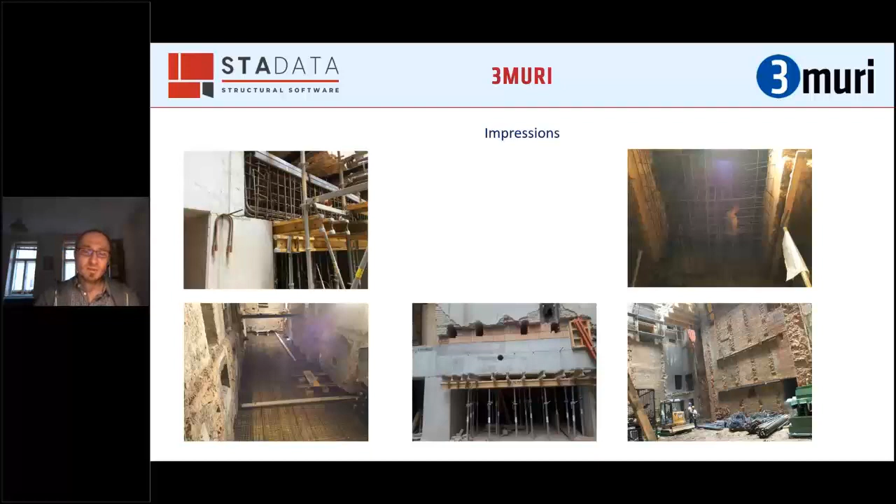We leave the wooden beams inside and strengthen them with other wooden beams, and then above it comes a solid timber board connected with outside and inside walls. Yeah, there were also a lot of concrete works done because that building had 3 basement floors, which got a garage inside, and then it is the building after all constructions were done, how it is now.

So that is more or less the end. Thank you very much.

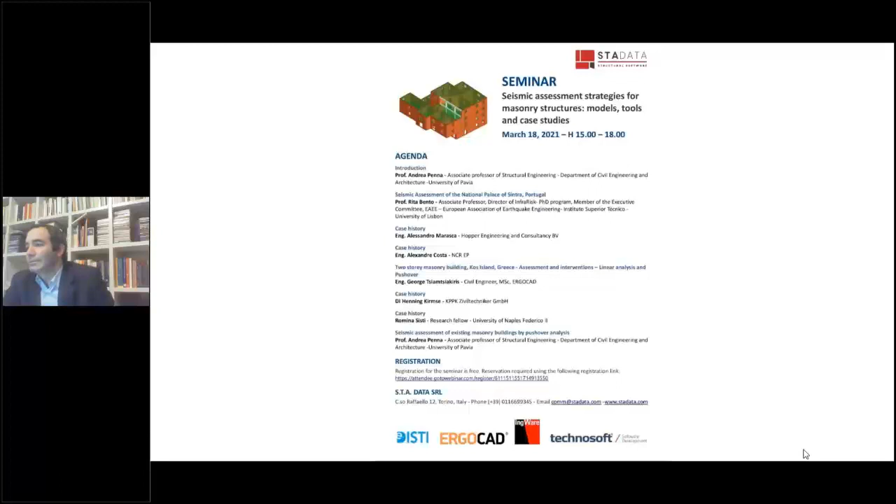Okay. Ciao Romina, welcome. So we cannot hear you so far. Good evening. Okay. Yeah, good evening, Romina.

Okay, so I can leave you the floor for your presentation. I don't know exactly what will be the topic of your presentation, I guess it will be about the analysis work that has been done for the city of Camerino. Exactly. Okay. So. Okay, we can see your screen. Okay. Okay, we can see the presenter view instead of. Okay.

While Romina is solving this technical issue, I can say that this topic of Camerino is very interesting because the city of Camerino was completely closed after the earthquakes that struck central Italy in 2016-17, and it is really a very relevant work that Romina is going to present.

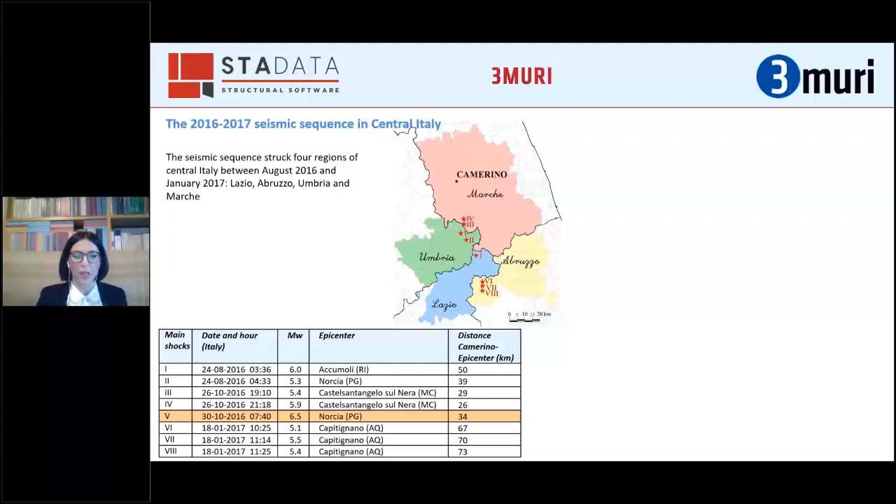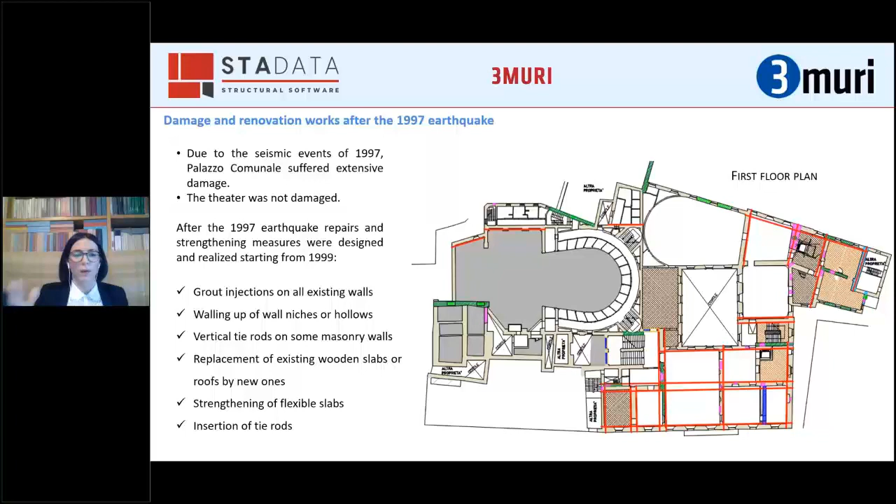The 2016 event represented an opportunity to evaluate the effectiveness of the strengthening solution adopted in 1999. For that reason, we carried out in situ surveys to detect the damage caused by the recent earthquake.

I will show you a brief overview of the main damages. We observed some cracks on the interface between the main facade and the vaults at the ground and first floors, but no damage was observed at the top floor. So we can rule out the possibility that the main facade or a central portion of it was subjected to a vertical overturning, while the vertical arch mechanism may have been activated.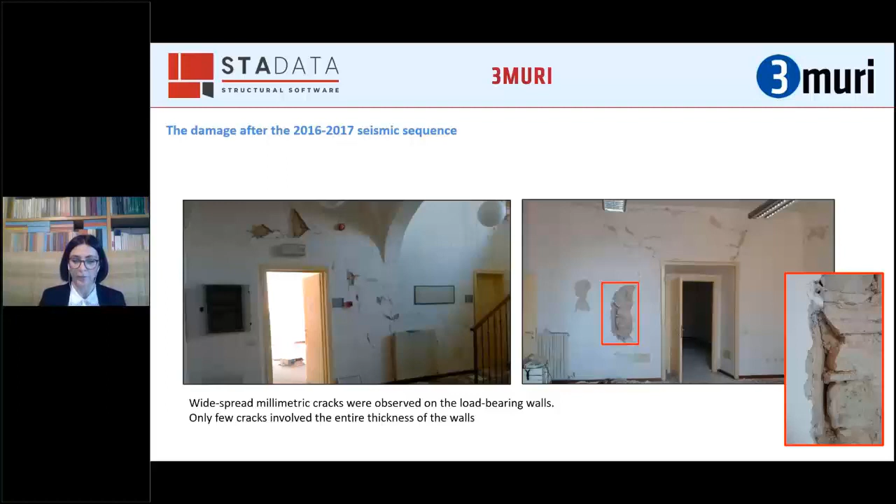Severe damages occurred in the non-structural components, in the stucco decorations. Sometimes inadequate construction details cause local damages, as in the case of the connection of these wooden trusses and the masonry underneath it.

The most severe damage was observed in the theater, where the external layer of the masonry gable crumbled due to the poor quality of the masonry and caused the partial collapse of the portion of the underlying roof structures. In addition, the earthquake caused disarrangement of the theater's roof covering, and unfortunately the necessary countermeasures were realized only after 3 years, so the rainwater penetration led to the collapse of the camorcanna vaults in the gallery.

As mentioned before, Palazzo Comunale is part of a masonry complex, and given the historical evolution of the complex and the structural morphology of the structural units that made it up, we decided to split the complex into 4 structural units having homogeneous characteristics, and model each unit individually rather than considering the numerical analysis of the entire complex.

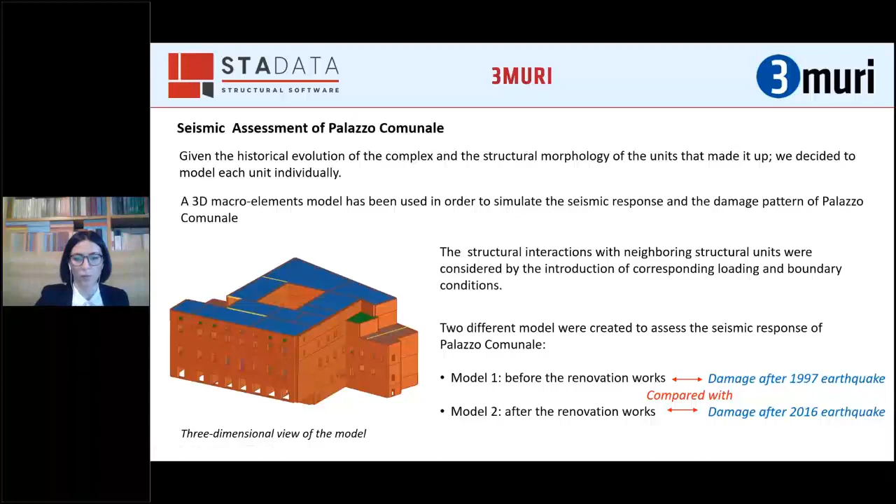So, to investigate the global response of the building, a simplified displacement-based procedure using nonlinear static analysis was performed. The model was loaded with a distribution of in-plane actions, monotonically increased to simulate the effects of inertia forces. Two systems of lateral force distributions were applied, non-simultaneously.

The first distribution was proportional to the displacement of the corresponding first modal shape, chosen since it was representative of the behavior of the structure in its original undamaged configuration. The second distribution was proportional to the inertia masses, more representative of the behavior of the structure at collapse. As control node, it was decided to adopt the average displacement of the nodes at the roof level.

To express the results concisely for the two models, I have reported only the values of the minimum seismic safety index, the alpha parameter, defined as the ratio between the maximum value of seismic acceleration corresponding to the attainment of the life safety performance level and the expected maximum acceleration prescribed by the Italian code.

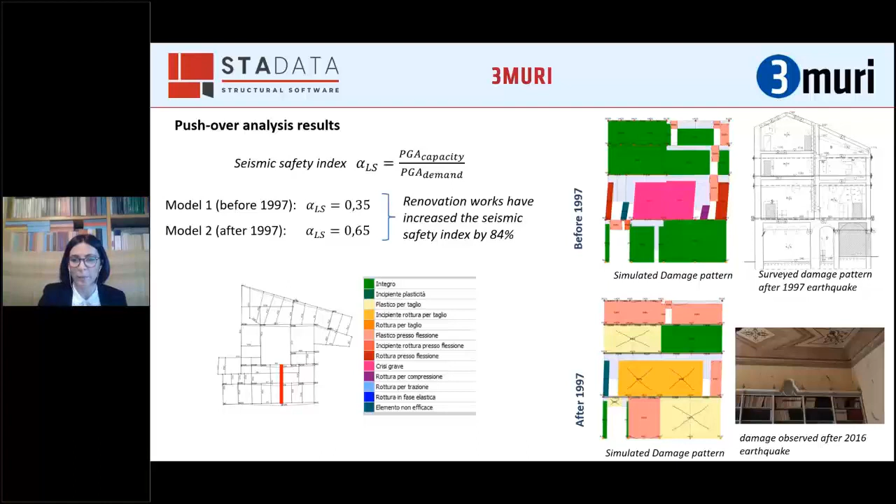Regarding the results of the analysis related to Model 2, which considers the Palazzo Comunale after the renovation work, we can note that the seismic capacity corresponding to the attainment of the life safety performance level is equal to 1.41. This value is 65% of the design value prescribed by the Italian code.

The achievement of a capacity equal to 65% of the design actions was exactly the design criterion adopted in the project. So we can deduce that the results obtained with modern analysis do not diverge from those obtained with the calculation methods available at the beginning of this century.

We can also compare the seismic capacity with the maximum value of peak ground acceleration that occurred during the 2016 seismic sequence. As you can see, these two values are very similar. In fact, the damage observed after the earthquake perfectly coincides with the definition of the life safety performance level.

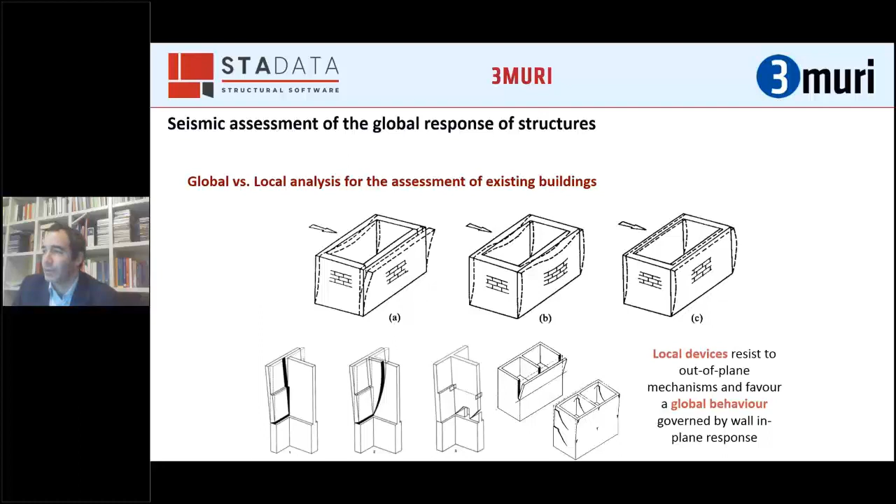The use of pushover analysis - pushover is a nonlinear static analysis, which allows carrying out static analysis. So we accept that in the calculation of the displacement demand we will use some simplified formulae, but we can identify the evolution of strength with lateral deformation, and we can identify potential mechanisms and fragile elements. We can predict the localization of deformation demand in specific elements, and we can then try to target our interventions to improve all these characteristics.

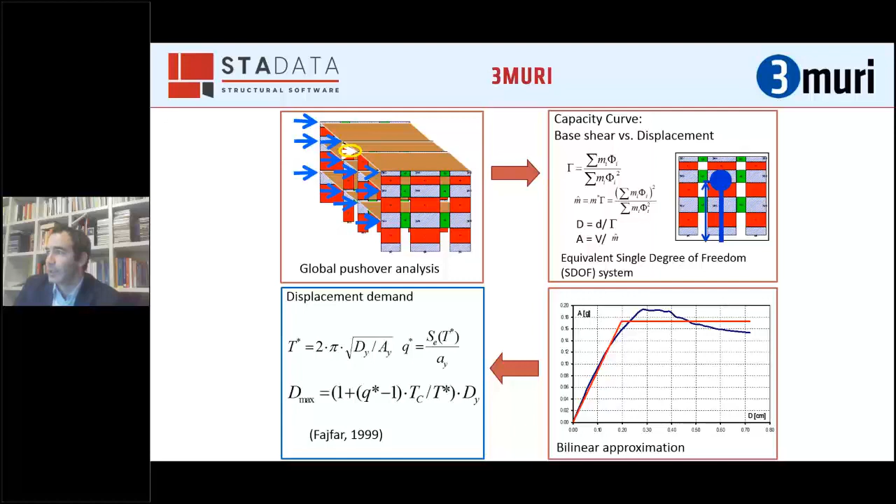What is also relevant is that pushover analysis provides the evolution of capacity with increased lateral displacement, but also it allows us to check the spread of damage and the peak of damage for increasing displacement. In this sense, it is widely recognized that lateral displacement in particular is a good measure of damage, a good proxy of damage. So we can easily use this global displacement as a measure of the damage levels for different limit states. In particular, you can identify these points on the capacity curve, identifying the different limit states, which can be operational, slight, moderate, severe, or near collapse limit states, depending on the codes and depending on the definitions that the code provides for these damage states.

I was saying before that we need a tool, a computational model for running pushover analysis of masonry structures. There are many characteristics that this tool should fulfill, and so it has to comply with all the failure modes of all structural members that can be included in the model.

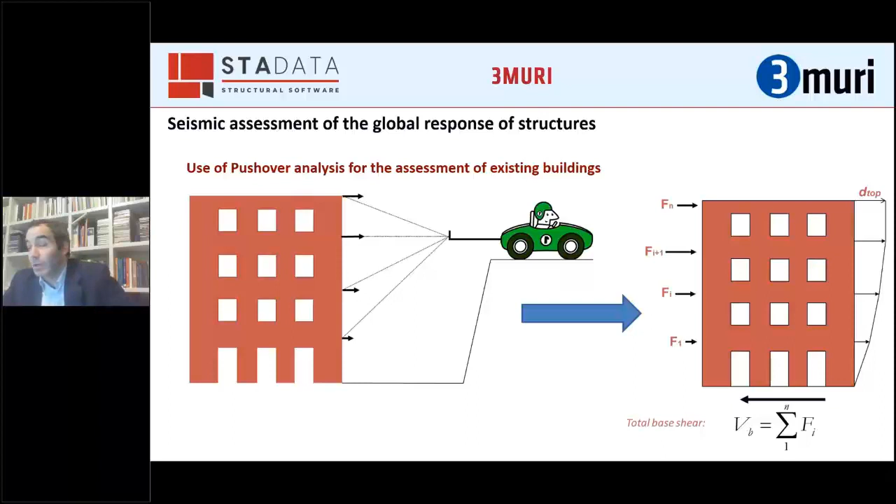In terms of results of a pushover analysis, we have the evolution of the base shear, which is the sum of all applied forces, expressed as a function of displacement. This can be a real displacement, typically at one node at the top story, or a virtual displacement, which can be a combination of displacements at a given story, usually the top one, in the case of very flexible diaphragms.

Starting from this analysis, we get the capacity curve, and then the capacity curve can be transformed into a spectral diagram with spectral acceleration and spectral displacement. The curve can then be approximated by a bilinear curve, which is helpful to compute the displacement demand. Different codes provide different solutions for this last step, and we will see that in some cases they are very different and can provide different results.

The result that Alessandro Galasco was showing about the Netherlands is actually related to one of these cases, in which the original version of the Dutch code refers to a very conservative prediction of displacement demand.

The equivalent frame approach is something we developed following observation. If you look at the damage after major earthquakes in masonry building areas, the last relevant one being Croatia, you notice that damage is typically concentrated in specific elements, in particular in piers, in some cases in spandrels, or a mix of damage in piers and spandrels. These are the elements where we typically have damage concentration.

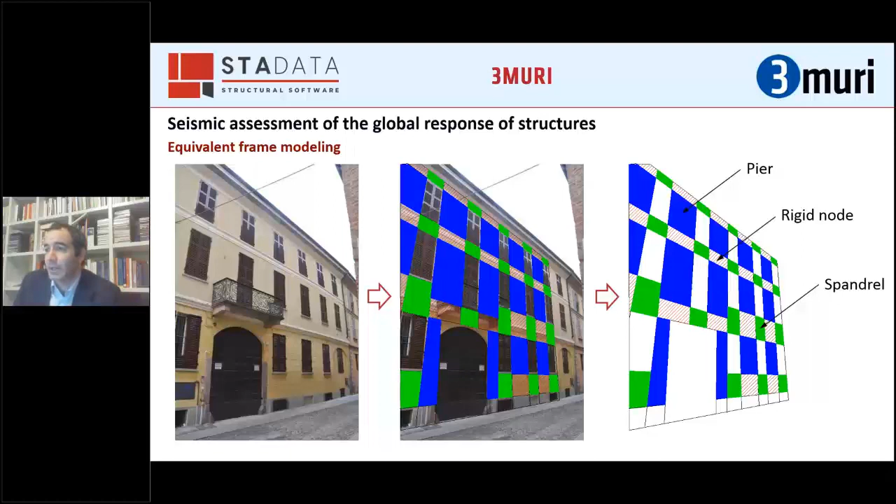The identification of an equivalent frame model from the geometry of a facade can be almost automatic and trivial, or can require the specification of clear steps. You can see from this plot the rationale followed in 3Muri for this identification: you first identify spandrels, then piers, and the remaining parts are assumed to be the rigid nodes, the rigid portions of masonry connected with the nodes of the frame, represented in the figure on the right.

This is somehow simple in the case of regularly distributed openings. Even so, when you are close to the ends of the wall, you may need rules that increase the effective height of these piers, and this can also depend on the type of lintels above your windows or doors. If the lintels are very well connected and deeply embedded into the piers, you cannot have a crack starting from that point, but then you tend to have a lateral pier height equal to that of the neighboring opening.

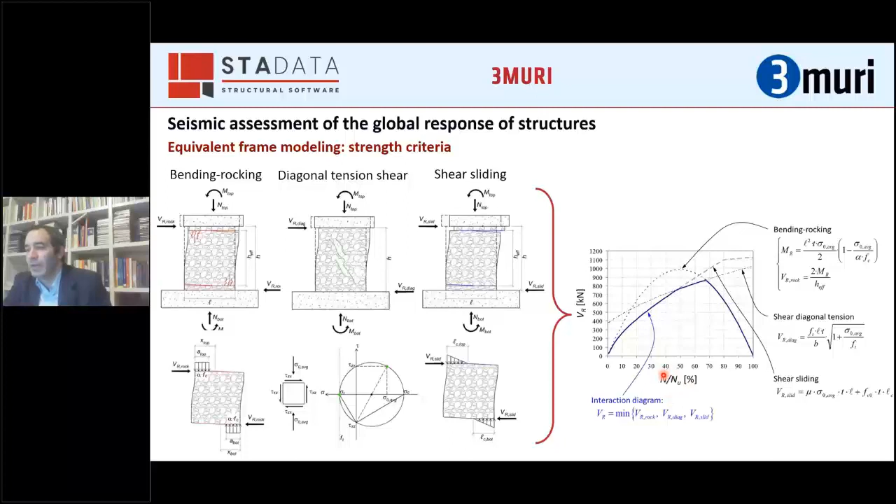A common aspect of all these criteria, typical of masonry elements but not only masonry, is that the lateral strength strongly depends on the applied vertical load. So we can have different behavior and different governing failure modes and strength criteria depending on the level of axial force acting on the pier. This is an example of what happens in one pier of one building, and the model needs to be able to reproduce this kind of effect.

When we push this wall from left to right, we have a variation of the axial forces: typically an increase on one side and a decrease on the other. In this part of the interaction diagram between axial force and shear force, we see we are governed by this line, associated in this case with diagonal cracking. If you look at what happens in the other piers, the situation is different. If we push the wall from right to left, these piers appear with a lower axial force, and the governing criteria changes. So we need a criterion in which the pier accounts for this effect and considers it in the mechanism that is activated and the displacement capacity associated with the different mechanisms.

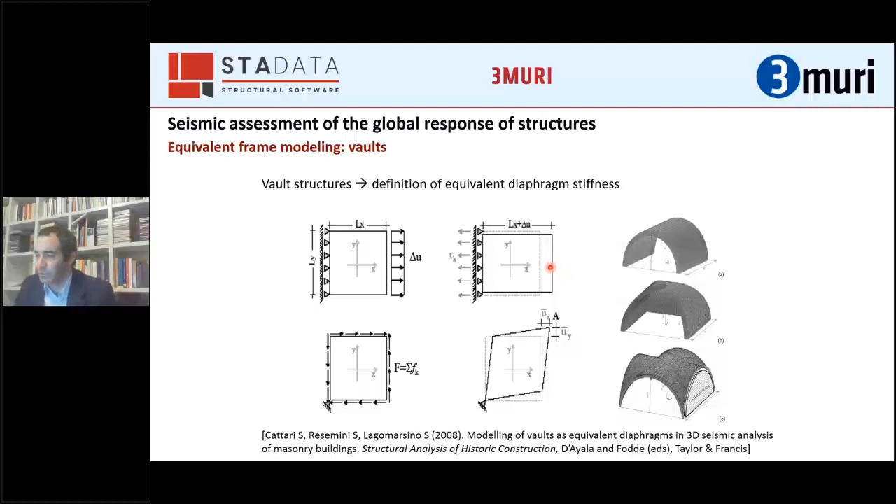In the case of very flexible diaphragms, the model allows analysis of single walls. This is generally correct in the sense that if wall-to-diaphragm and wall-to-wall connections are effective, we can assume out-of-plane displacements are prevented—as seen in the video at the beginning of this presentation. But we cannot count on any coupling effect of the floors in transmitting forces from one wall to another, so we can work on these substructures, which are the in-plane analysis of walls.

But when we do this, we should also properly account for computation of tributary vertical loads and masses, in particular inertial masses that need to be properly evaluated in the case of in-plane single wall analysis. There's also the tie effect of floors: even if floors don't provide sufficient shear stiffness to couple displacement of different walls, they can couple the displacement of different nodes of the considered wall at the same level.

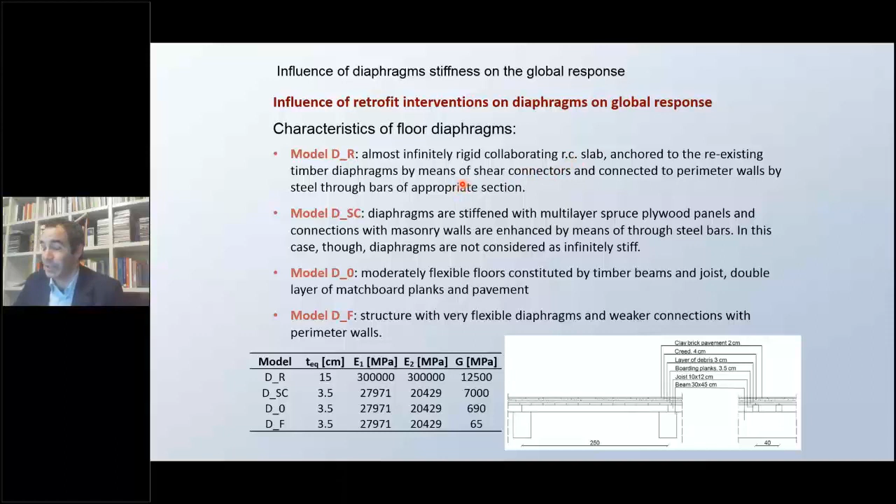With very flexible diaphragms as the initial condition, then moderately flexible floors where we possibly have some stiffening effect of double layer matchboard planks and pavements. Then an intermediate case of stiffening diaphragms with multi-layer spruce plywood panels—some timber-based interventions—and almost infinitely rigid floors obtained by applying a collaborating RC slab stiff enough, as in some interventions presented regarding the Vienna buildings.

Modal analysis shows that for very flexible diaphragms, we typically have independent modes for the different walls, whereas for rigid diaphragms we tend to have a global response. This is also clearly checked in the percentage of participating masses, which is 46% in the flexible diaphragm case and goes up to almost 90% in the rigid diaphragm case.

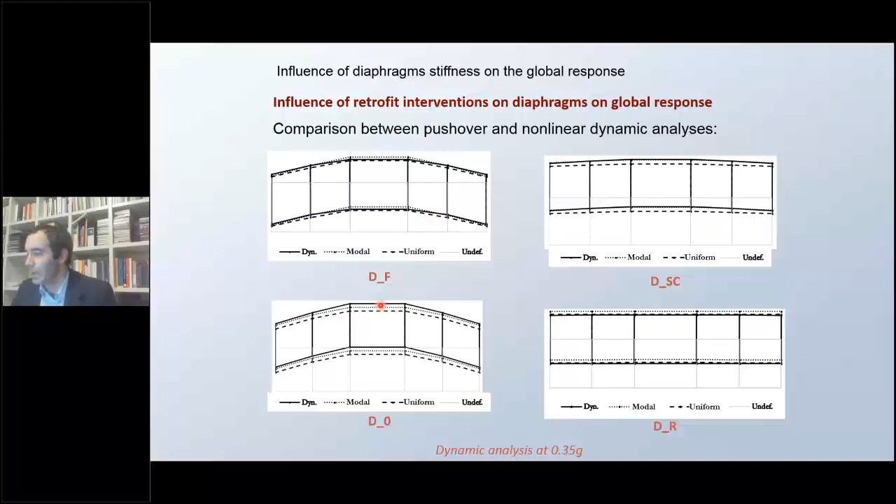The point is that not only the displacement shape, but also the displacement demand is approximately well captured, but in some cases, depending on the load pattern adopted for the pushover analysis, we have better or worse approximation. This leads to the last point of this presentation, related to the approximation intrinsic in the use of nonlinear pushover and nonlinear static analysis for computing displacement demand. As I was mentioning before, when we use a simplification like this, we need to use either an overdamping approach, which is the one embedded in the capacity spectrum method, or we can use inelastic spectra, which have a spectral reduction accounting for ductility.

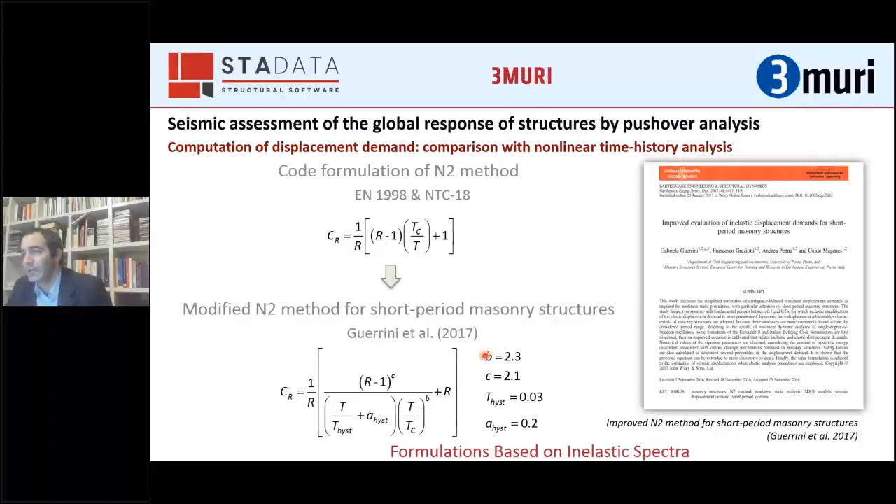So I thank you for your kind attention. I hope also this final presentation, which was not as nice as the previous one, but I think it has been quite interesting to have something different at the end.